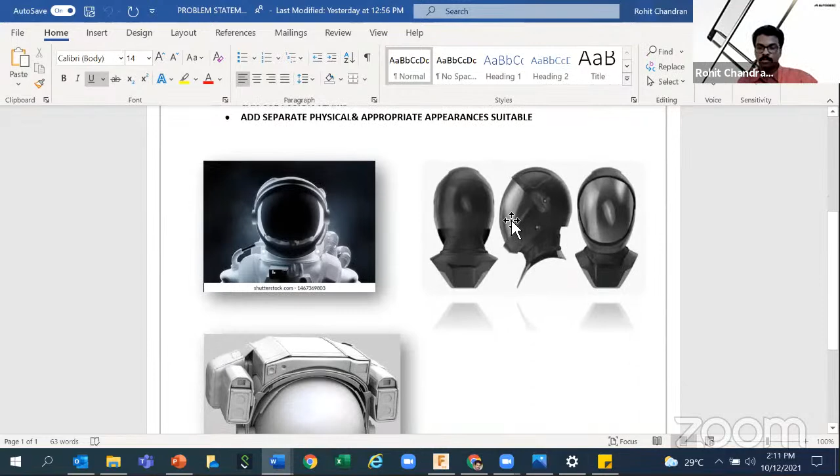There was one activity I showed you yesterday: design a custom space helmet. This was just for practice. If anyone has done an interesting design and wants to showcase it to others, I will tell you the best way to share your design right now with us. The problem statement mentioned yesterday was that you can add a reference canvas, use the 3D modeling tools, and then add your own imagination and creativity to finally come up with a 3D model. It was meant to be simple, not much detail on the inside, just something about the exterior. That was the main objective. Hope you had done that.

Let me share my Fusion screen and show you how to use the cloud to share your models as an instant link. So with that, I can start.

This was our yesterday's project, and you can see that whenever you update some content in Fusion Team inside the project, it will be updated with the time slot. Just right click and select share public link. That option is there, and it's very user friendly. We're not asking you to attach long files to share your design, no zipping the file, nothing is required. Just go for share public link.

Here you can see, just activate this option, and this one link will do. Even if I just copy paste it into any browser, directly anyone, without even having Fusion 360 or an Autodesk account, can view your model in 3D. Let me show you how.

Why I'm telling you this is, if someone wants to show their design, just put the link in the chat so that we can directly copy paste and show it here, if you really want to showcase what you've done to others in the form of a 3D model.

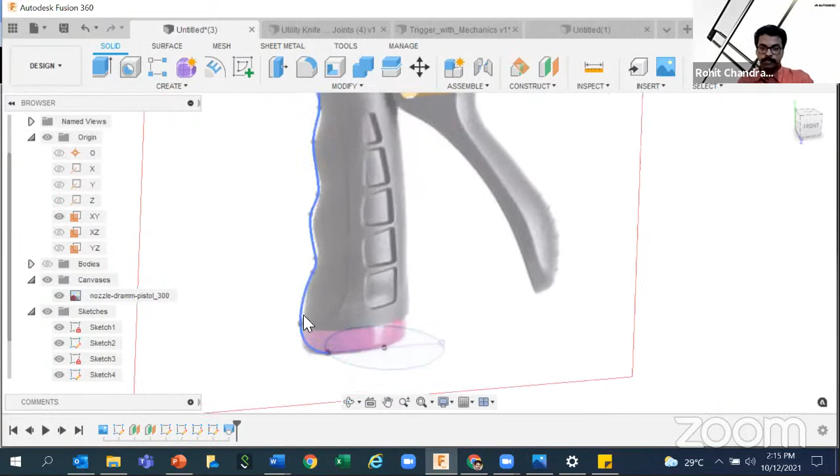You know what is spline? Then after that, I had done a loft so that I can get the profile. Since this is not a surface, you may be wondering how I got the profile directly.

So that's actually with the help of that guide rail that I had used for the loft. The loft, once again, I can show what all things I had selected: two profiles, top and bottom, then this guide rail. This is one extra option.

Unless you give this option, it will be directly like a straight joining, just a 3D model. But if you want to have some more patterns or contour, if you are really focused on the outer or exterior design, you can add this guide rail, but make sure that guide rail or extra profile is intersecting with your other two profiles.

Otherwise, you may go on getting more errors that the profile is not intersecting properly. So make sure that it is joined. And whenever you are seeing any error, please don't close that and don't start over once again.

Read the error, what's the software saying to you. Just understand where is the error. Maybe it's a small problem. If you came a long way up to the final stage and you are finding some issues, you think everything went wrong and you start over once again.

Because during the competition, the time is very critical. So if a time stop is there during the live competition, it will surely help you. At that time, if the software is not showing the right outcomes, don't worry.

Just read it, what's wrong, what's happening wrong with your model. Just focus on that, zoom it, and if no joining is similar to that issue, just edit that. Just click on OK, because Fusion 360 by default is following the parametric modeling approach.

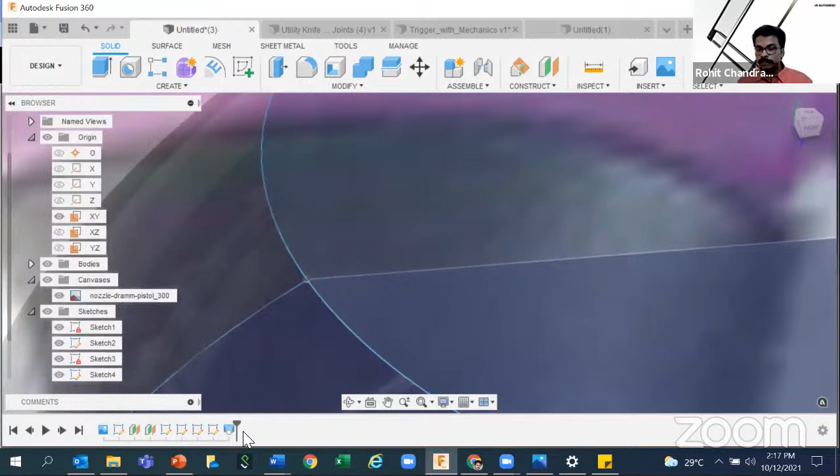So if you modify any of the parent features, the subsequent child features will get modified automatically. So that's wonderful, the tool is with you directly. You can modify using this timeline. So you don't need to start over, you can just edit it and proceed.

So that's the thing I just like to highlight to you. If in case you want to edit the sketch also, you can do that, right? So this was the loft profile.

Then today what I'm going to do is take a new tab, and I'm going to show you the next environment known as freeform environment, or basically the designers call it sculpting. So just click on create form, and you can see that all the icons change to the purple color. Actually, not the same icons, these are different icons, correct?

But check the name: create, modify, something known as symmetry, utilities, and other things, construct, inspect, all the things are similar to that of the solid modeling tools, correct? But here it follows a separate uniform color code, it's like in a purple shade.

And I told you yesterday that whenever we are seeing any options with this blue shade, that goes for the solid modeling. And inside the surface, you can see all our orange guys, so that means that is dealing with the surface, correct? And again, form is this one, which is another sub-workspace inside the design itself. So many options are there inside this design workspace, this is one among the option.

Okay, so here you can see that all the tools are coming in this purple shade. Whenever you just type S and go for extrude, I told you that you will get the command that you can use, correct?

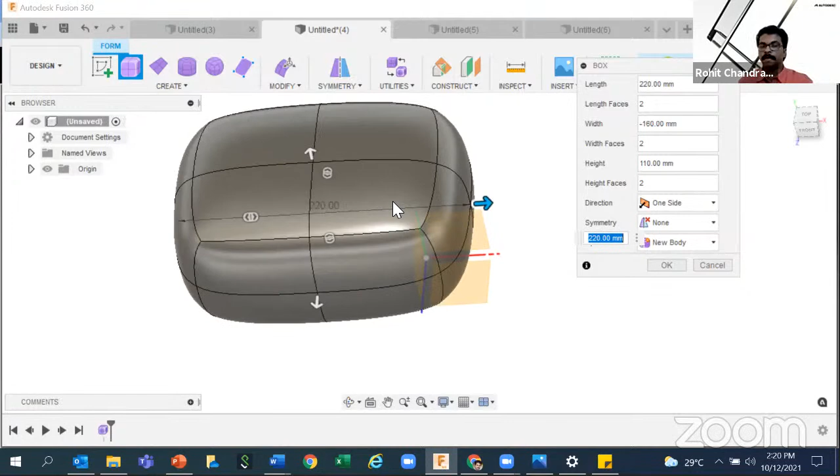And I told you that freeform modeling, designers also call it the sculpting environment. In sculpting, based on the operations or forces that you apply on your raw material, you get the defined shape. You can sculpt it, right? Whether you are wood sculpting or rock sculpting, based on your operation, you get the outcome. So just think this is the digital replica of that same thing, meaning you should have more features to get your job done.

Yes, what you think is correct. You can do many things inside this sculpted environment. Right now I'm just starting with a box. My plan is to introduce you to this tool, not just showing simple designs and saying this is how it works.

So this is the box then. Before deciding the dimensions of the box, you can put it using this manipulator, and again one more option is there. These are actually for dividing. I'll tell you why this division is coming. So division across the width, across the length, and across the height, you can make the proper division.

For the time being, I'm just keeping it as 2 minimum, minimum value 220 by 160, and that to the negative value. Negative value simply means in the opposite direction, no other extra meaning. I'm just clicking on OK.

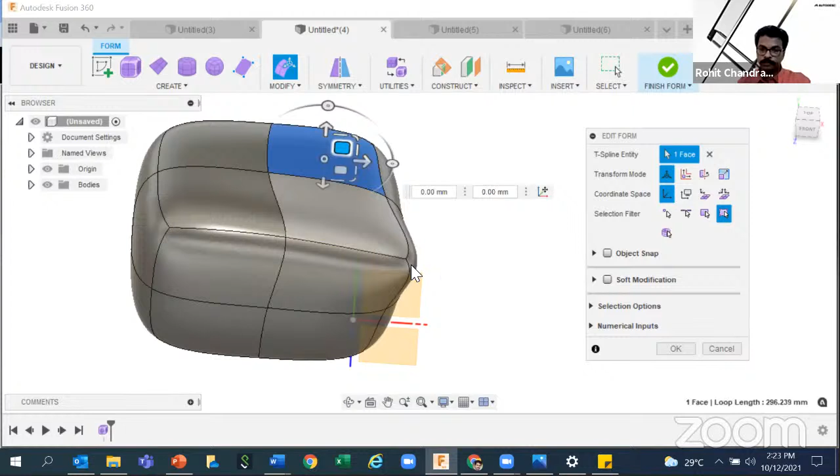So this is your advantage: either you can select your face, or you can select the vertices, or else you can directly go for the edge selection. And these manipulators will surely help you align based on your design or creativity. Suppose if you have any background canvas image, you can focus on that and gently go to the respective views and get your design done in the right manner.

Right, so if you want to pull, if you want to push, anything can be done. I'm just distorting this box just to show you how much freedom you have with this tool. So that's just a simple edit form tool.

But moreover, we have lots of other options to create both surface as well as solid models. Don't think this freeform environment is entirely for solid modeling. It comes with both. Basically, we will get the surface models and later we can thicken it.

If you are using box directly, you can create the solid body. But see what I'm going to do right now. This top face I'm just deleting. By hitting the delete key, I can see that a hollow space has arrived. Now what's inside? It's like a cavity thing.

Now if I simply click on this finish form, what I can see is actually a surface, not a solid model. So this is having 0 thickness, and the depiction of the surface model is just the orange wrapping that you can see on my screen, in the browser. So I just deleted one face and I got like this.

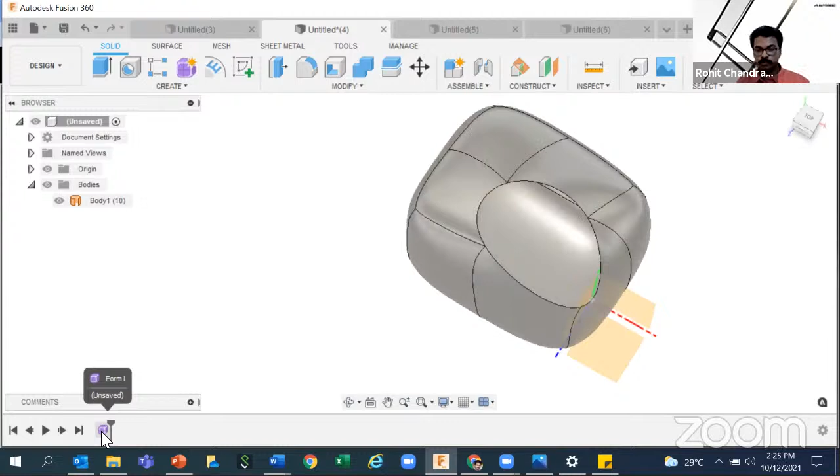Now let me go back. If you want to edit or go back to your previous design form, just double click on it, or right click edit feature from the timeline. Both will work. Now again, if I want to fill the hole, there is one option known as fill hole. As the name suggests, it will fill the hole, fill the gap.

Now I am tired of searching from modify because lots of tools are there. So what I can do is type S and get the thing what you want. Fill hole. Just double click on it so that the whole selection will be done, and you can instantly see that your model got filled. Now if you click on finish form, you can see that it's a solid body.

It has some definite thickness, but that's not our point of thought right now. How you can design it with this tool, right? So let me show you a few more options before going for the live exercise.

There is a cylinder primitive here. Just click on the cylinder primitive, and either you can decide the correct dimensions here. This is 115.171 mm. Either you can hit your keyboard keys and type the value you want, or just simply make one more left click so that you can see a 3D preview. In this 3D preview, you have more options to edit: what is the height, what is the diameter, and what are the divisions.

So right now you can understand why this division is coming. Divisions are basically for helping us to modify further. You can see that across the diameter 8 divisions are there, and across the height 3 divisions are here, and these are the numbers where the user can override that. But there are some limitations. If you give a higher number, software may fail to show the preview because at the end it's actually a code. Software code is working.

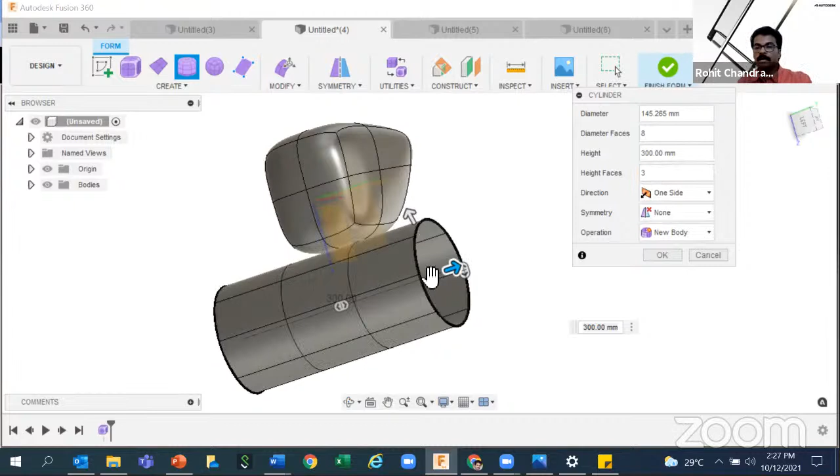What the user is giving, it will be happening and reflecting at the back end. So some limitations, some upper limit or lower limit will be there, but for the design purpose, you can keep initially a lower division, then start working on it, and there are extra options to add or remove extra divisions. Many things are there. So this is a very user-friendly feature. I can say that once you understand how it is working, or once you have created a small earbud or headset using these tools, you will get addicted.

Because there's a small form of addiction also there, I can surely tell you that, and that addiction surely will take you to further creativity. So let me show you a few more tools before going further. Modify, here you can see edit form. If I double click on any edge to select it, that will make the selection for the whole loop. Otherwise, if I simply click on one edge, it will show as a yellow highlight.

So yellow, as I told you, is one of the color codes inside the software UI that will help us understand what's happening right now. So if I select this, it means the surface got selected - just one face, one division got selected. Now if I click here, the edge got selected. So edge selection is highlighted as yellow inside the T-spline. Again, if I make two more left clicks, the whole thing will be selected, provided there are no breaks.

See, here also the whole thing got selected. Now comes the modification. So if I pull it in this direction, I can see that it's getting distorted. Let's do some interesting things, right? I can scale it like this.

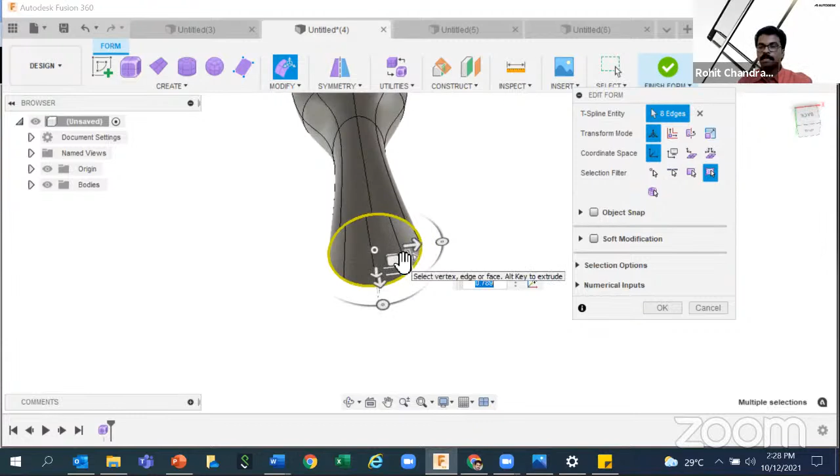Okay, now I can click on here. I can again scale it. Scaling option is there, many selections are there. This is for translation, scaling, as well as rotation in all 3 directions, X, Y, and Z. So that's your pretty advantage. You have more options to clearly manipulate your design. So you are the user, and you have the freedom to control your design, how it should appear.

See here, so easily you can do like this. For example, you can understand that if you want to create a wine glass or something, you can select the options accordingly. Right now I had selected one scaling option, which is coming to one direction. So if I select other, I can see the depiction coming, or what you are seeing on my screen, it will be changing the form.

And anything that you had or made a wrong choice, just do Control Z a couple of times. That will take you to the previous position. Control Y, Control Z, both will be working while keeping this edit form command active.

So that's the one thing I like to tell you, that you can design and you can win prizes. But if you follow the best approaches, it will help you design very efficiently. The thing is that you don't want to put lots of mental strain to get your design done. You can stick to your timeline. I mean, before the timeline, you can finish your job, provided you're working efficiently.

Working efficiently means that practice and patience you want, and purposefully you have to understand what will go wrong if you go beyond some limit. That means you have to make mistakes. I'm not telling that in one or two days you will be an expert. You have to make mistakes, then find what you made wrong, find a solution for that. So that's actually the best approach to move forward with any CAD software, especially Fusion.

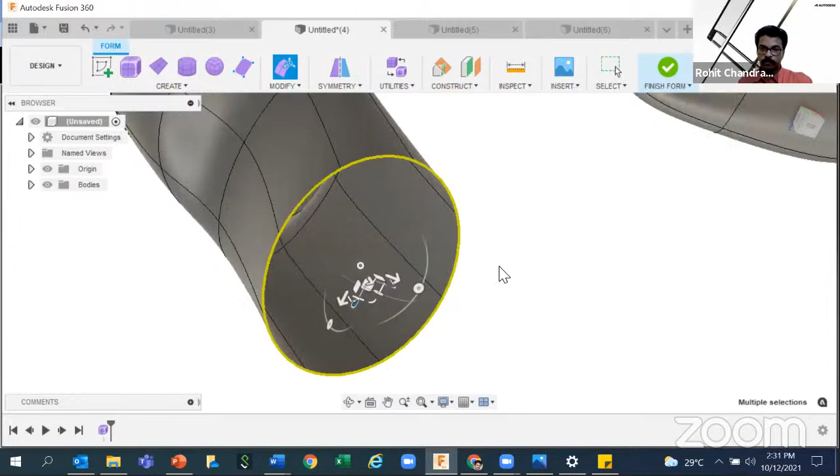So now let's move a little further. I like to show you one more tool. Double click on it and go for the edit form, and you can see that if you click on the Alt key individually, and if you pull it, or if you just use the scaling option directly, you can see that one extra face will be coming, or one extra division.

Suppose if I click here and go for edit form and hold down the Alt key, after that you can press on any manipulator, so you will get some extra projection, right? Extra projection you can get, and that too according to your selection only. Whether you want in one direction or other direction, you can extend it.

So that means creating an aircraft wing, I mean with the aerofoil shape, it's very easy inside. So anything aerodynamic, more fluidic, more related to the 3D contour, you can manipulate the curve and get the job done. But the confusion comes if you have two designs, how you merge one design to another. So that's the more questions that you have in your mind. I understood that, so that's why I started from the primitives.

So we have more primitives, not just the box or cylinder. We have torus, right, in the shape of a donut. And again, that is subjected to modification. You can use individual manipulators and you can do the job, right? So many things are there. And finally, these four things: extrude, revolve, sweep, and loft.

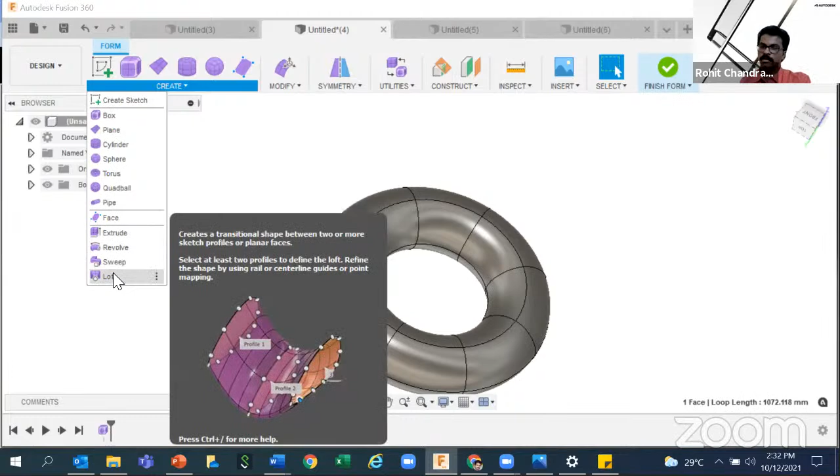Same concept, but you have more freedom. For example, if I'm taking one more design file, then going for this freeform, highlighting the planes, then I can simply have a spline here. But this time I'm not going to keep it closed. Yesterday I told you that I'm going to keep it closed since that is a solid model. Now I just simply leave it like this. Then let's see what happens if I do the revolve here.

See, you can get a direct model. But this is a surface. Again, this is T-spline, so more divisions you can manipulate using the edit form. So that's the quick story you can understand, right?

If you double click on it, you can see that you can pull it up so that you can change the shape. But whenever you are dealing with your design, go to the respective orthographic views. Otherwise, if it is in a perspective view or any other 3D tilted view, then you cannot understand that what you are doing is giving you the right result.

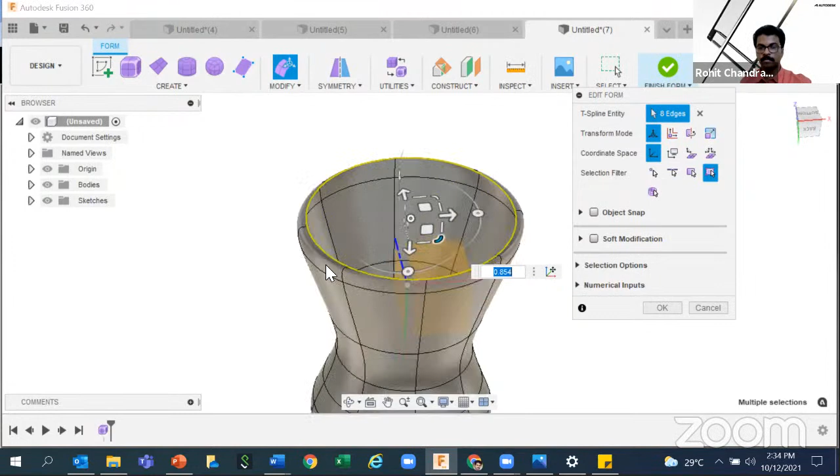So you can pull it up, you can expand like this. And again, if you hold down the Alt key and expand, you can get like this. Some extra bend over, many things you can get. These are design modifications you can do quickly. Right, now there's a hole here. Correct, so you want to fill that. So coming back to the fill hole option.

Fill hole, done. And for the filling pattern itself, you have the choice: collapse is there, reduce star, and fill star.

So it's a big environment, a big tool actually, a set of tools. Earlier in the older Fusion versions, it was coming as a separate workspace, but in the newer versions that all of you are using, it's coming as a sub workspace. So understand that lots of scope is there inside this sub workspace.

Again, if you want to design a cup, in a few minutes you can design a cup. You can design a handle using the sweep pattern. Many things can be done. If I go on explaining, I can show you all the tools, but we have time limitation.

Instead, what I'm going to do is we will go ahead with one example. What is that file that you have to open right now? Let me show that to you. Here there is a file known as trigger with mechanics.

So that file is already shared with you, trigger with mechanics. Just upload that. Upload where? Upload to your cloud.

I already did something, but I want to show you live, so I'm just uploading, re-uploading. The file name is trigger underscore with underscore mechanics. See here, the software identified that it's a Fusion native file, so F3D, and the file size is 5 MB. Just click on upload and wait for a few seconds.

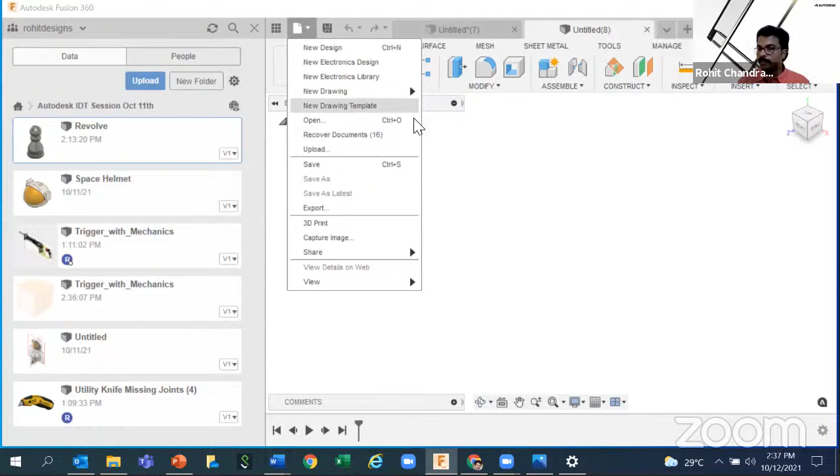You can still work and you can save your design. You can export your system as well as directly save to your local system. So many options are there to save your data, whether to the cloud or to your system with any format you want, it can be done.

Okay, so this is the file, trigger with mechanics. This is actually an assembly of a reciprocating saw.

Yeah, one second, let me take it. Yeah, trigger with mechanics, yeah, this is the file. It's the latest file. The earlier one was which I was doing before the session, so I'm just taking the newer file. How can I understand this is a newer one? Check the time slot.

So it's loading. Okay, this is your file. No outer body is there. And here see the timeline.

It's a big list because it was done after many features, that's why you can get a scroll bar. Understand that for your designs also, the timeline will be big because you have to do lots of job. Even for the competition, you may be using multiple features, even the sculpting itself you have to use. So many editing options that will be recorded in the timeline - it's actually a good thing for you because everything will be recorded in a proper manner.

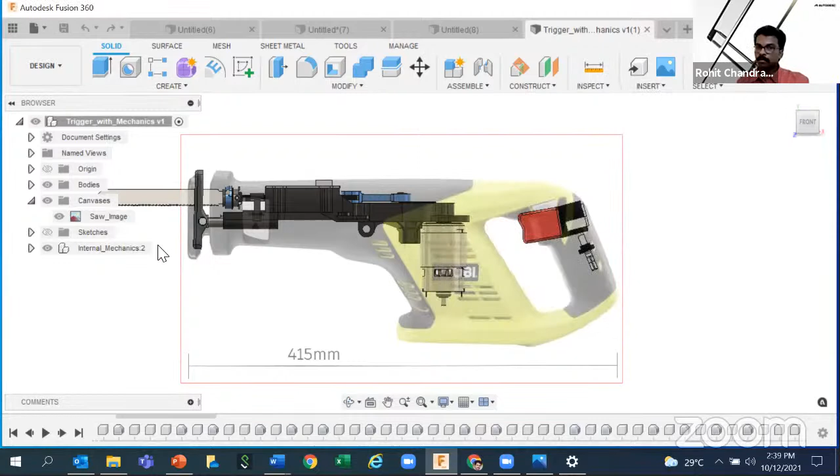Now check the design. Here there is a reciprocating saw image, and canvas means insert canvas, what we did yesterday. Just add an image to your plane, any plane you want, then you can position it. For this exercise, there's only one view, one side view, with the dimension 415mm, that means 41.5 centimeter.

If you are really focused on dimensions, that's also important, because for the competition nothing is rough. You have to keep it in proper dimension, and again tolerances, any deviations, some limitation will be there, plus or minus some value. So you have to be more professional.

But for practice, I'm not saying you should always go for dimensioning, because the freeform tool will stick to your mind mostly if you're working in a free manner. Explore it. Then finally, if you're creating some product, go with the dimensions. That's my simple suggestion.

Right now we are going to be a little more professional, because I'm going to show you how you can create the outer body with the freeform. So there is an option known as calibrate.

Once you click on calibrate, nothing will come up. What you can do is simply click on one end and the other end, and you can see the value coming up. This is either to scale up or scale down the image, not the model. Already we have the model, this is the case I'm explaining.

If you have a 2D orthographic view, I'm telling again orthographic view, not a perspective or any tilted view, then only you can take the proper reference, whether you want to take the sketching and move it forward with the 3D model. So at that time you should make sure you are sticking to the dimension.

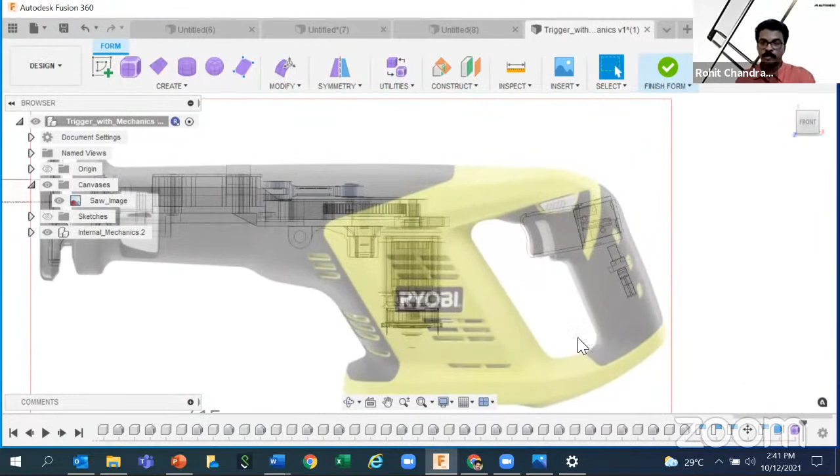We are not focusing on the internal assembly, but we want a reference, to check if our design is clashing with the mechanism. That needs to be kept in mind, that what you're designing should not clash with the inside or any other extra protections in your design. We have this, we are inside right now. It's already calibrated, I mentioned you.

Now let's use one cylinder, the same cylinder, and I have to decide the plane where I want to keep the cylinder. I can keep it here, or here, or here. But for our purpose, I want to create a handle, something more organic. So we have to think a little more ergonomic, whether it will be user friendly for us humans, whether we can easily hold that thing. So we have to make sure what type of design you are going to do with your tools.

So the position is the important thing. I'm selecting that plane, and there's a red line coming here, that will help you snap it properly, because we cannot create a cylinder here and think it automatically focuses on this handle. We can create the cylinder anywhere and use a move tool, but the best choice is to use the snap option.

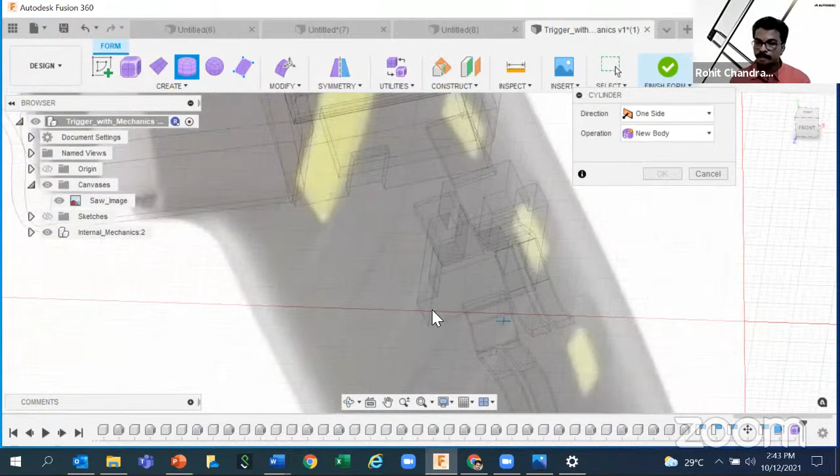The reference software already has the snapping option. So see here, I'm just creating a cylinder here right now, skipping the dimension. Now I got the bigger dialog box asking me for more, what's your specified dimension - the diameter, height, how much you want.

So you can control it, either you can manipulate it, so the manipulator will help you get the outcome based on your drawing, or if you want to go more specific, you can type the value. Let me keep it at height 70 and diameter 45, something somewhat in range with that of the image. That will do - okay, so now I got the cylinder.

Yes, it's not aligned with my drawing. So you have this move copy tool, or simply type M - those are the default shortcuts. You can easily get it, or type S and type move. So just readjust here. Okay.

More focus we can do if you're really concerned on the outer contours, because the proper designing has not started yet - we are just positioning only. Now you can see that I had used that red line, so that's why the divisions are coming exactly in the middle.

Let me tell you guys what I'm going to do. I will explain my plan, then we can move forward - otherwise you will be thinking what this guy is going to do next. So I will explain the proper plan. The plan is that I will complete the cylinder - the positioning of the cylinder - that's already done.

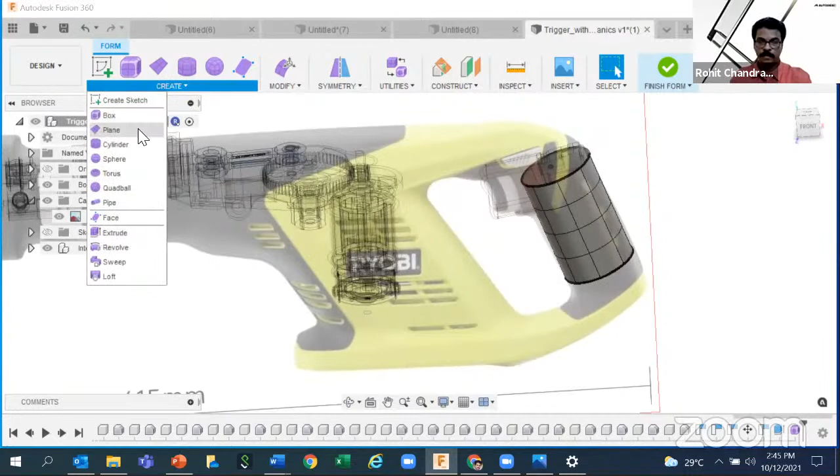Then I will place one more primitive option known as face. I will create a small face here, and that is clearly a surface. Then I will use the edit form options to start designing, and at some point I'll have to make connections between one T-spline and the next T-spline. So I'll be using some connection options - I will tell you what those options are.

Right now, just understand this small thing I'd like to mention: two primitives I will be manipulating, and somehow they need to be bridged. So there are lots of bridging options. Once I am done with one half, I will simply mirror the other half, and my job is done.

Otherwise I'll be thinking about what will happen on the other side, right? So instead, this is the quickest approach. If you want to design something symmetric, focus on the left or right or top or bottom, then just mirror it - your job is done. Otherwise, you can still focus on both by activating a symmetry line.

Anything will work, but for this I am just using this approach - completing one side and replicating it to the other side, then adding extra options so that I can modify that as per the image. So this is my plan, just understand this is my plan.

Now, as per the plan, I told you that I just need the half, so the other half I don't want. So I can simply delete it, or drag and select, or do the manual selection as well. Hit your delete key or right click delete - so done, one half is gone.

So we want just one half. Okay, now I can use what - face. I really request you, don't stop here. I had shown you box, I had shown you cylinder - that doesn't mean other tools are not okay. All the tools will come into picture based on your application.

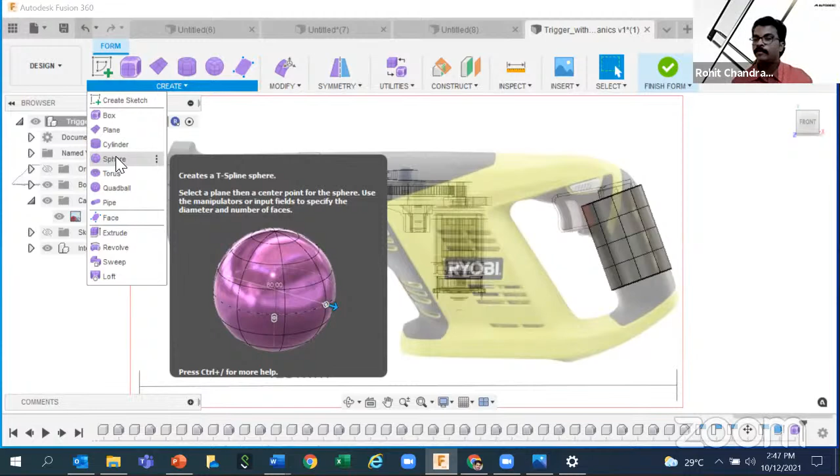So many options - this is a very useful tool for designers, especially for the IDT category. You can easily get the job done, and you can click on finish form, and add some physical material to complete it, right?

So I need to stick to the time - I have a proper time schedule as well, so I have to complete this exercise in the coming minutes. So this cylinder is done. Then the next new option, maybe you may be knowing this.

Face - so I have to just draw a, let's call it, quadrilateral or a parallelogram. Don't focus too much on this perfection - okay, later we can use the edit form manipulator.

We have that good guy with us, so we can easily manipulate. Right now I just covered this logo, RYOBI - never mind, that's just a branding, so I just covered that. I want something like this.

Done. Now what I can do is use the move copy tool, because if I go on designing, it's not actually a 3D thing, so I cannot expect that. It's wrong actually, because if I design here, it will clash with my internal mechanism.

Instead, I can type M and take it outside. To how much? That's a question. Go to the next view and make sure nothing is going to interfere with your internal mechanism. So I just moved it a little, just a move tool, nothing else, up to this. Okay, now the fun really begins.

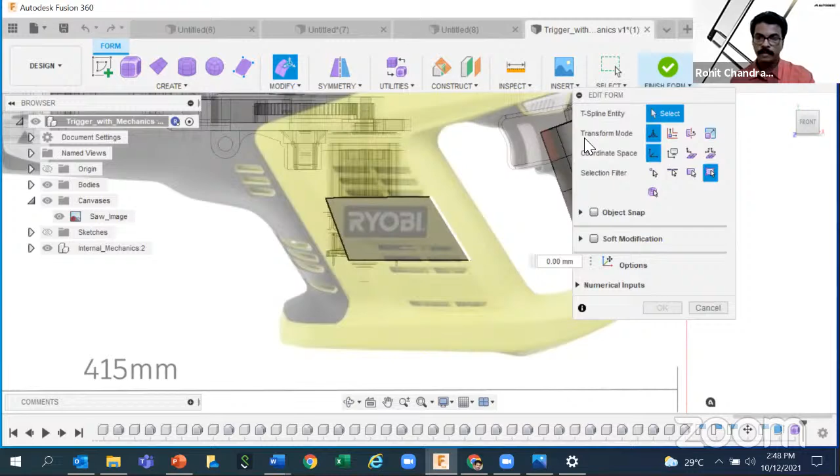I'm going to use the edit form manipulators. Holding down the Alt key, you will get another face or set of surfaces together. Right now we have only one edge, so I just pulled it like this. Then here also, I will repeat the same thing.

Why am I doing this? Okay, the next step I will complete that. If you make a wrong selection, no worries, do it once. So I want to keep it near this corner, so that's why I want that bending properly.

This bending - that's why I just created one more extra projection using the Alt key. Then here, Alt key. Or if you skip the Alt key and do it directly as I did for the other, that will also work. Somehow it should come as an S shape.

Okay, so you can modify. Because there is no top view provided with us, we have just one view, so you have the freedom to use your skills or your imagination. I just created a small curvy shape.

Now the next thing is again right click, edit form. Just pull it up, pull it down. Same here - make sure that everything is selected.

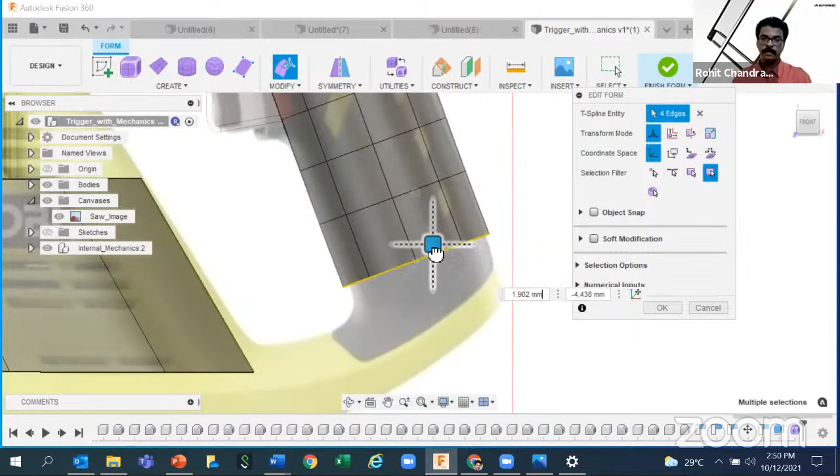And while working, don't focus your neck towards the screen because that will give you some health issue. Just sit in a comfortable position and zoom it, because zoom is very active now. Use the tools appropriately so you can work for a long time. Just zoom it and pull it down until some point.

Right now I'm going to select this and this set together. Using the control key, I made two selections, and using the Alt key, do like this. Why do I have to do this? I just clicked on two edges and built like this. I'll tell you why.

Now there is another option where I can connect these two - I can make them friends. Right now they are not knowing each other, so there is a bridging option. I can select this edge and this edge, then click OK, and automatic bridge will come.

Once again I can do this, because some tools you think show some magic, but understand what is happening actually. One here and one here, and how many faces you want in that bridge - everything is T-spline, so everything will have some divisions. I'm just keeping it as 1. Suppose I keep it as 3 and click OK, I will have 3 divisions - that's the meaning.

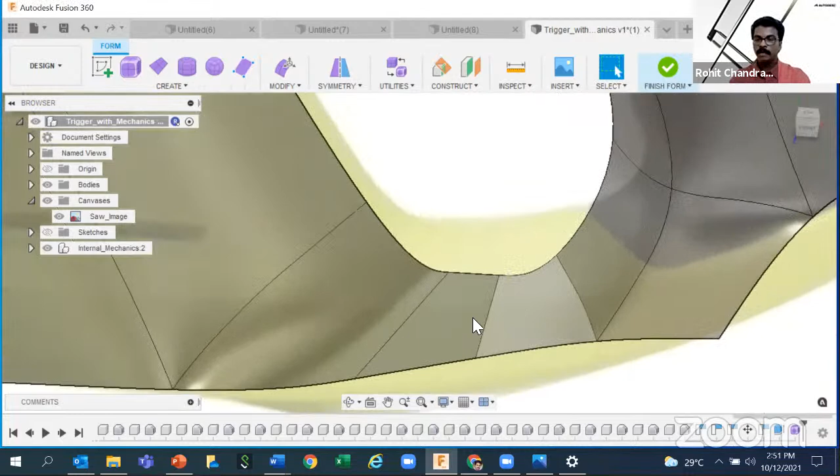So if you understand properly - I am just telling you, don't memorize anything, because that will not help you. Imagine, try to imagine what's going to happen. Done, so we made that bridging using the bridge tool, so right now they know each other.

Now our further task is to pull all these things down. Usually you can pull it, or you can use the manipulators to pull based on the image. This is fun, because designers may already be doing this - if you want to design shoes or kitchenware and you have that picture with you, the side view, you can do this.

Focus more on the perfection if you are really onto that. Right now, due to the time constraint, I'm just showing you the possibilities. I can also share more learning resources with you.

So I had done up to this. Now again, I made up to this, and you can disable the canvas, and you can see how you're progressing into the bodies. There is some sharpness, never mind that.

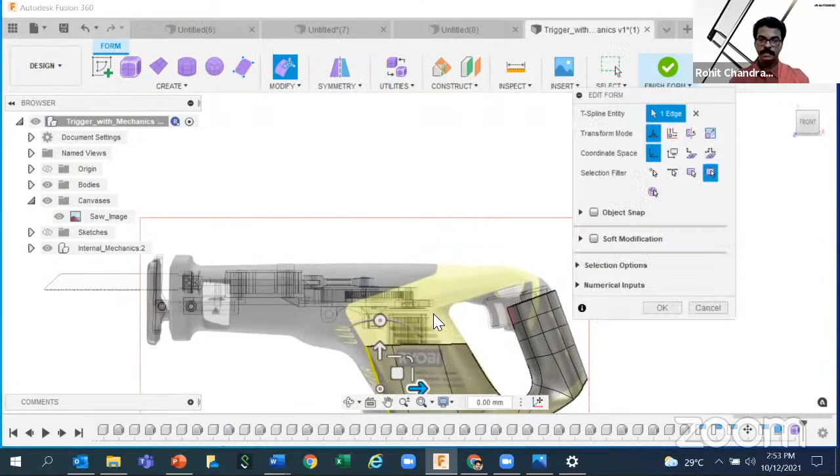We can use the manipulators. Right click, repeat edit form, pull it up, and here also up. Now you can understand what I am doing actually. I'm just pulling this thing as that of clay, right? Just applying some forces. And if some actions I made wrong, just undo that.

So here you don't need any prior knowledge to play with this tool, because anyone having some curiosity and imagination, even small students or small kids, can do that. Once they understood how it is coming, the next choice is how you can more leverage it. Once you understand how it's working, it's easy for us. So scaling option, translation, and rotation, all are there.

So again here, now I want to make another connection here. Merge edge option is there, or bridge also we can use. So this is another connecting option, merge edge, one edge to other, then set to selection. Automatic join will be coming. This is automatic, but make sure that your model has right proper edges.

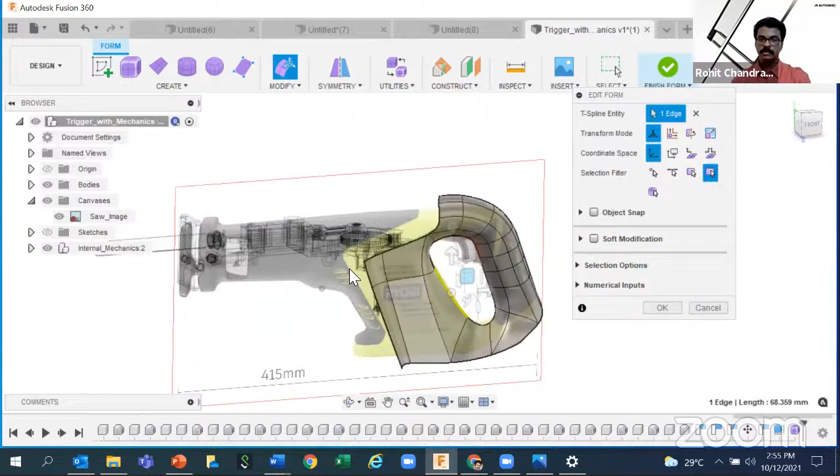Yeah, let's move further. So here you can shape it. Guys, please understand this is a professional tool used by designers, digital designers across the globe, so many outcomes are there. I will also share a few designs done by students who won lots of prizes nationally as well as in other events, and also our gallery, Autodesk Design Gallery. We got a gallery, see.

But initially I won't tell that this is too easy. Actually how I learned this is that I made lots of mistakes. Then I understood that something is not happening properly, what I am thinking, some issues are there. So do it and again redo it, that will help me. So what I did right now, I just pulled those two edges together to the left.

So I can have this small, like an opening, like a mouth, right? Now we need to close this mouth. We want to shut that mouth. And a few more things we can do.

I can pull it up. But make sure no two edges are intersecting, because that will create another issue. If two edges are intersecting, you will get an error from the software saying the two edges are intersecting. So remove that, because software cannot have two edges intersection. That's actually a wrong feature, wrong thing, so you have to edit that. But right now, as of now, we don't have any intersection.

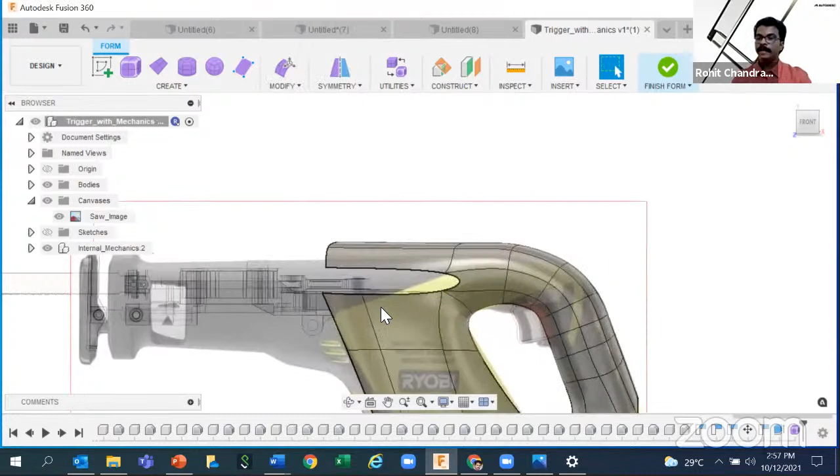So I did up to this. I will pause for a small break once I'm done with this other half. Then again, there is a small option to weld the vertices. I mean, we can do welding also. Welding means point to point, we can stick it together so that it will behave as a single surface. So there is an option known as weld the vertices, or type S, type weld.

See how much it is easy for you to get the command. Then pick the points. And sometimes you may be getting a box-like appearance, but try giving inputs in another manner, just change the selection. That will help you.

So see here, I had done the weld also. I just cancel it because I want to show you once again. Repeat weld vertices, click the points. Understand what is happening right now. Point to point, it is going to get merged. So that's the meaning. So once you understand what is happening, right now this is not showing a proper preview.

So I want this also to be joined to this group, so all these three points merge into a single point. So vertices can be welded together, that's the meaning.

See how fast we had done up to this. So you can imagine if you have some designs, whether you want to design a door handle of your home, then you want to 3D print that, how fast you can design. That's the power of this sculpting. But we are not done, we reached up to this level. And some of you may be wondering that its shade is just a steel shade, how you can make it colorful, right?

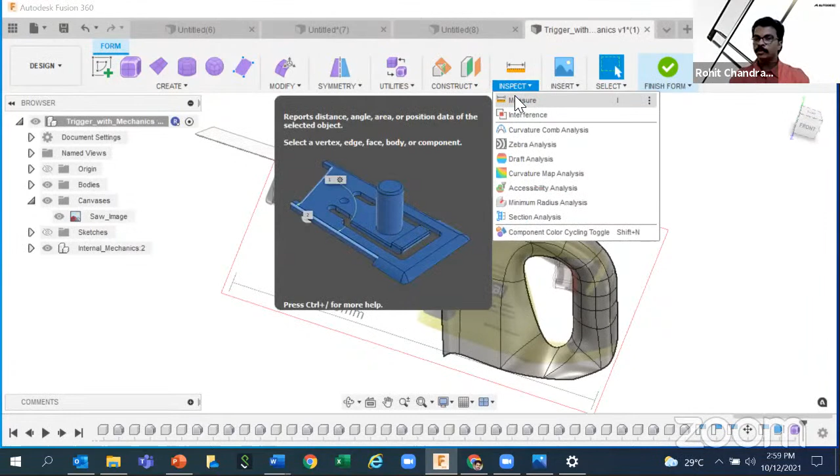So there's an inspect option here. If you want to do some quick inspection, what are the dimensions, all those things you can do here. You can select the edges and get the measurements instantly on the screen. This is a live measurement tool.

Here goes the inspection. So I am going to show you another tool known as component color cycling toggle. If I click on this, I can see some color codes are coming in my timeline. It's divided into some colors, and my surface changed into an automatic shade, more like a cyan shade. But if you try this option, you cannot expect the same shade you are seeing on my screen. It will be different, so that's the thing. It's an automatic color code. Never mind, if you want to really work with this, it's for you. Otherwise, you can simply turn it off. That is not going to create a big impact on your design.

Understand, this is not the appearance or physical material. Physical material and appearance, here goes that. Already yesterday I had shown you, same thing applicable to here as well. But this is just for creating that color. Okay, so I can disable that.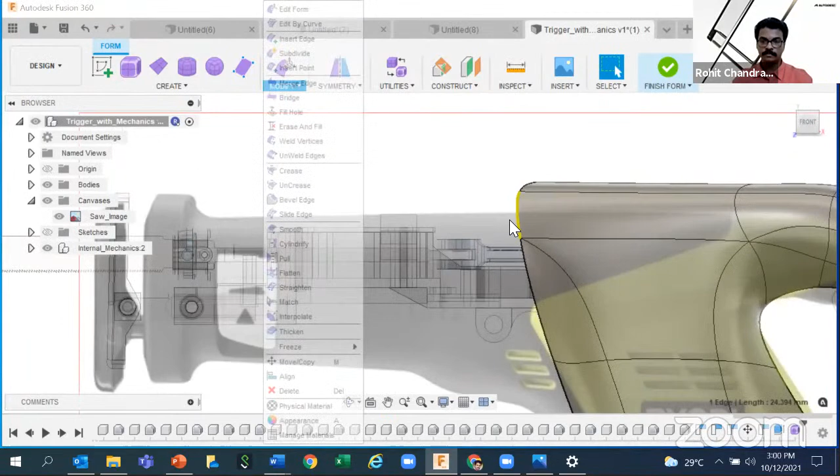Now either I can move forward and complete the other side of the question. Edit form, then use the alt key to pull. And you can again pull it down. Then you can do the weld vertices and complete the job. But that may take a few more minutes. I'm just showing you, opening the doors for you guys, how you can do this with the help of a canvas image. I need to create the other half. Due to time constraint, I'm just creating the other half and completing, because we have the assembly as well as the rendering, animation, and the technical drawing still left.

I also like to show you one more extra tool known as generative design. That is also for creating structures, that can help you, so I like to give an insight on that as well. I have a strict time today, but never mind that. If you want to come back to us, we are always happy to help you, because practice only makes you perfect.

So I'm just pulling it once again. What I did just now is I just made that curve straight. That's why you have to view in different orthographic views. You are a designer, you are not sticking to one side view. You have to look at all the views and check whether your design is okay from all views.

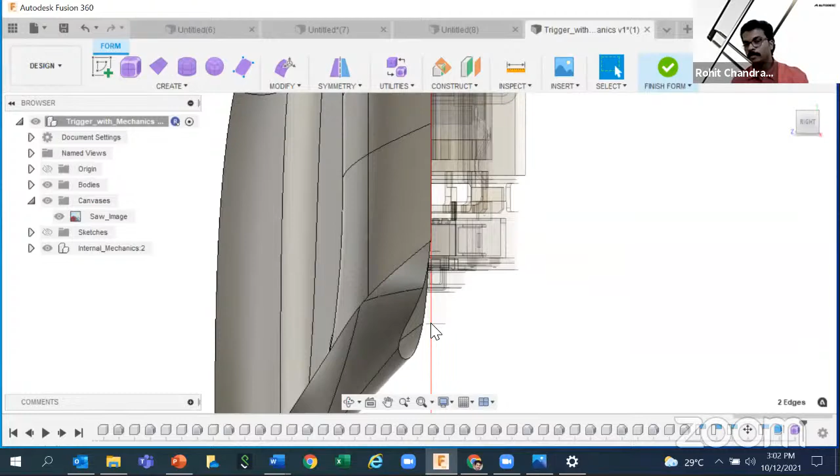So I had done up to this. Now I have to create the other half. But before that, I have to think on some point, that when I easily replicate the other half, I will get the exact half. Nothing is coming or interfering with this middle line. So if it is interfering or away from this middle line, that means I can expect a cavity, it's not the perfect half. So I have to make sure that it's actually a half.

So I'm just selecting this outside and inside loop, and there is an option known as flatten. You'll get this dialog box, you can select which plane you want. So automatically a small adjustment happened right now, so that it's perfectly flat. Earlier, if you remember, there was a small cavity here. Now it got filled. It's software, no? Software will do the job if you are giving the right inputs.

That's it, so we got the perfect one half. Then once I'm done with the mirror, I will open the questions. Now I just completed up to this 3/4. I'm not telling that full covering, full covering again will take a few more minutes. So I'm just limiting up to this, and I'm just going for a mirror. In the symmetry option, there is an option known as mirror duplicate. Just select your T-spline and the mirror.

Because lots of selections are here, either you can turn off the other body to make the selection pop up. So I just mirrored it. See how perfect the joining happened, because I had done the flatten option. But still, these type of things are coming. You know what you can do with this, you can pull it down or you can flatten the curve. Many things can be done. But understand that options are there. What you can imagine, software already has the option.

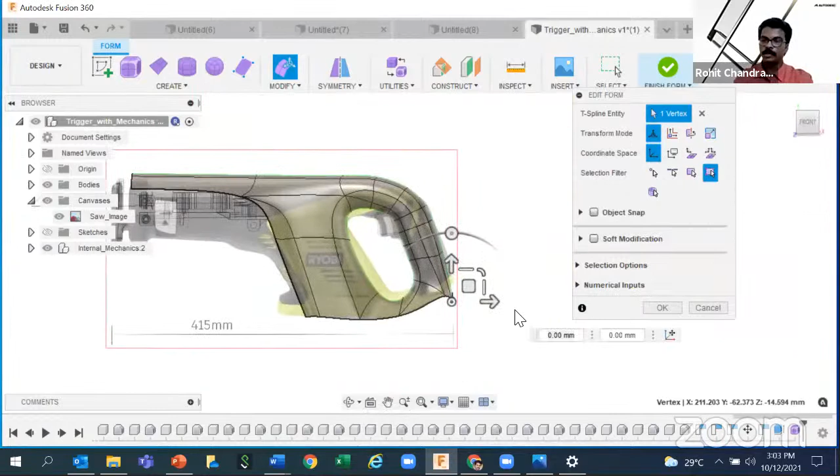Okay, so I replicated up to the other half, and everything is subjected to modification. If you design one face here, you can get a cavity, and you can use the fill hole option just mentioned, or you can use the insert edge option. If you think you need more edges to work on, more divisions, the insert edge option is there.

So what do you imagine? The software has the tool. Only thing is you have to find what the tool is and what you have to do with it. That's the only thing. So never think that the software doesn't have that option. It's well advanced and it's a cloud software. It keeps on growing, so there is no end for Fusion 360. It always has the latest tools to give you.

So I'm done up with this. Now I will do a small thicken and I will take a break. Thicken, right? I want to keep it 3D. Just a 2 mm thickness.

I can click on finish form. I can see that inside, the body trigger is actually already there. This is our newly created thing. And I can turn off other internal mechanisms and the canvas, so you can see that this is what we have created in limited time.

But never think that you can always expect this curvature. Errors will come, that's normal. Try to redo once again, so that will give you more confidence of the body. So just rename it for your purpose. Hope that is clear to you.

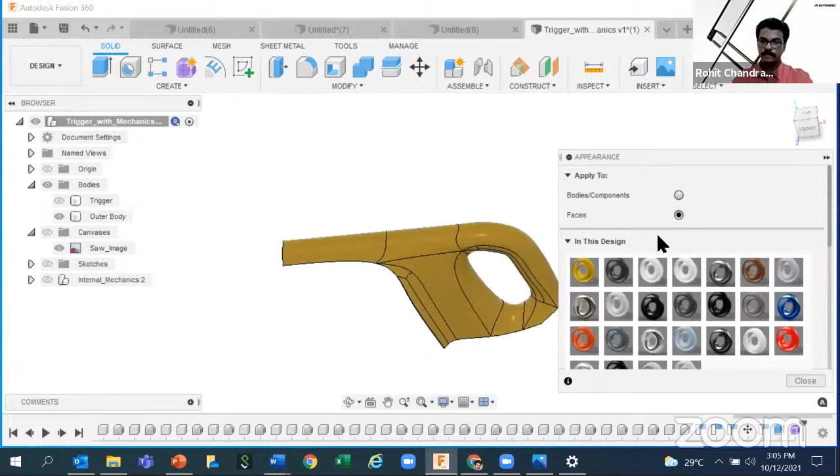Click on enter. Appearance. There's an option faces, then you can individually assign to shade. As you know, even your iron box will have two shades going, not just a single shade, because that's a new design. Multi-shaded design. So you just need to drag and drop, or if you want to edit the shade, you can edit that.

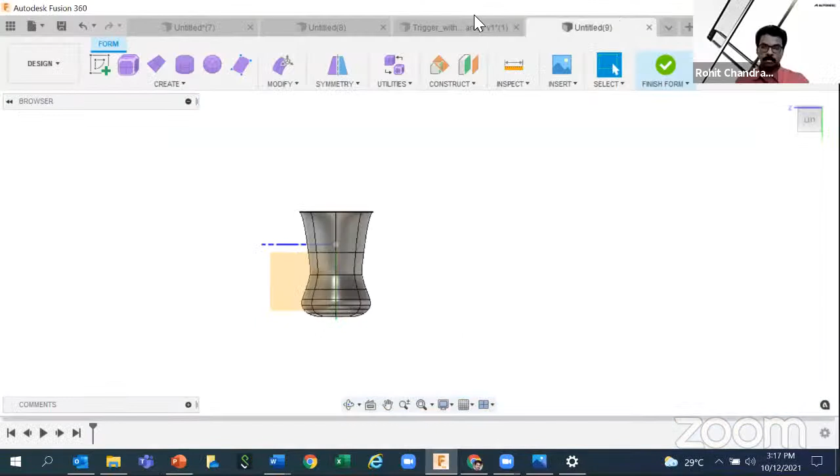Sure. Thank you. So let's resume. Yes, so we had done up to this one.

Okay, so that's free form. But please understand, here if you are even doing surface modeling or freeform modeling, all of it actually goes hand in hand. All these modeling environments, I mean solid - if you did anything with solid, or anything with freeform, or anything with surface as well, you can finally create a good 3D model using all three of these modeling methods. I'm not saying that only solid and freeform can help you, surface can also help you. Please understand all three.

If you are exploring the extrude, revolve, sweep and loft inside the surface as well, both will work fine. But here the surface thickness will not be there, and later you can thicken it. So understand what this tool is actually going to help you with - at least thicken. The same name comes up in freeform, the same name comes up in solid, and again in surface as well. So you can understand thicken will simply add thickness. So if you have a surface, the thicken option is there. And to find something, type S and get the command you want.

Okay, so moving to the next thing, because we don't just want an outer body, we want some internal mechanisms also, right? Because this is a competition - last time, the friendly competition, the problem statement was to design a mobile phone holder. I also checked that, so it's very interesting to check the creativity of the students.

So for a mobile phone holder, either you can think of it very simply, like a triangular support to support your phone. But if you are really dealing with online sessions, then you have a few more things that you need from your side. That means if you want to tilt the phone to portrait mode or landscape mode, some rotation features should be there, right? And if you want to change your seat position based on your comfort, then you have to adjust the height of that mobile phone holder.

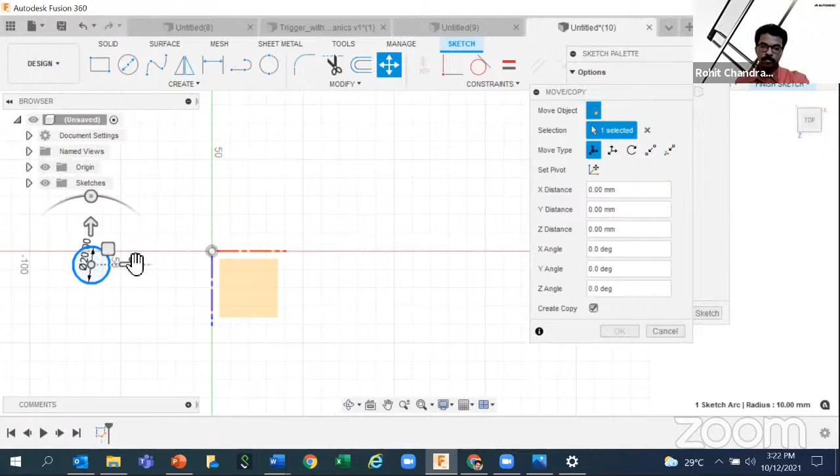That's why it's called move and copy—understand what's inside. Named just 'move copy.' Do you think that's just for moving? No, move/copy, meaning we can create multiple copies. That reduces your job again—you don't need to take the circle and create it again. Just select it and move it, and it will automatically create a copy, provided you're ticking this option.

So now we have something like this, and this distance you can control. And I want one more offset circle. Now I want just a line connecting this, and another line connecting this. Automatically, you can see that the tangent constraint arrived.

But if in the case it's not tangent, just pick it—these are the portions where you can use the constraints. It depends whether you want a concentric thing, concentric circles, just pick the two circles and keep it concentric. I mean the coincident—we use the coincident constraint while creating the layout to make two points coincident. Then there are equal constraints, tangent constraints. It depends on your situation.

So see how I did this. And again, if I want to trim the excess, there's a trim option here. If you had used AutoCAD before, there you have to first make the selection, then a few more extra selection options will be there, right? But here, just delete what you don't want. So just trim it off, because this is actually a similar feature from other Autodesk software as well, but more user friendly.

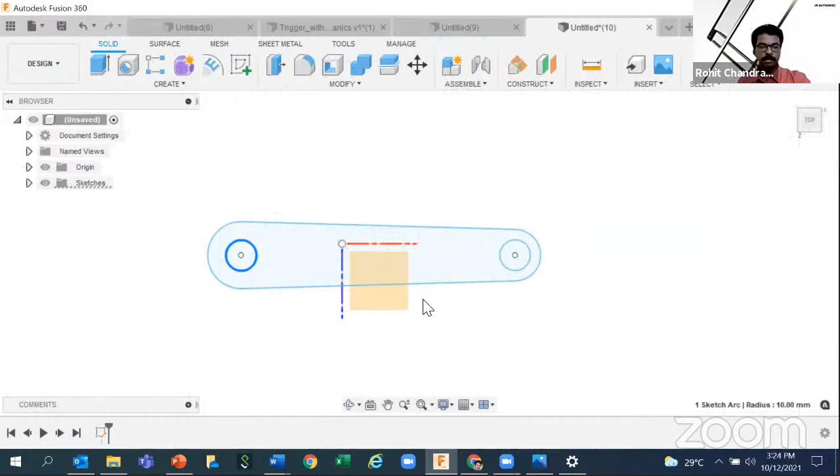But before the joint, let's make it 3D. So extrude, then thickness 10 mm. And also, guys, sometimes your statement will be mentioned in inches. That depends—the unit system is an important thing. Don't think that mm is the only option.

There is an option known as document settings here, and there is an editing symbol. You can override the unit system—centimeters, meters, inch, or foot. So please feel free to check this option. Otherwise you'll think you can only create metric, not imperial models with the imperial system. So both are acceptable—keep that in mind.

Why I mentioned this is because we will shortly be going to the documentation part—there we can document in both mm and inch. It depends on the industry; sometimes your industry will tell you that you have to do designs in inch, not mm. So you should know how to convert. That's why I quickly mentioned it to you.

So just have this thing—it's actually a body, right? Inside the body, I can see body one. Now I'm going to create a copy. How to create a copy? Make the selection the same here again, move copy—I selected as bodies, I ticked this option, and I got one more copy. So now I got two; one is the replica.

Never mind, I just got two. Now, how can I activate a joint here instantly? Okay, so there is an option known as assemble.

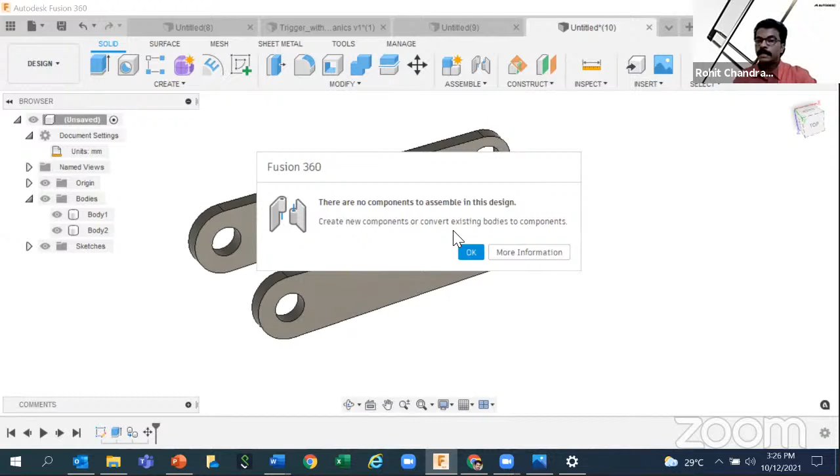So joint means it's actually a general purpose tool where anything scattered on this canvas, not white space, it's canvas, you can directly click on it and activate the joint. But see here, there are no components to assemble in this design. What's actually that? There are no components, clearly we have bodies, no components.

So you have to understand what is meant by a component. That's a small understanding which can help you create the joints. So with the bodies right now, it's not allowing us to create the joint. So component is somewhat a small concept, it seems same to you when I convert that into a component right now, but it's a different thing. So there is an option known as new component, or simply what you can do is select these two guys and right click, create components from bodies. For your eyes, nothing happened, but in the browser, something happened. The small change happened to this tree, it's coming as component 1 and component 2.

Now, if I do like this, it's free to move, and I can capture the position. There are position capturing options here. So right now, this is a component. Now, what's the difference between a component and a body?

Basically, few differences are there, I will point out all. If you have a component, then you can freely position it, number 1. Number 2, each component will have its own set of origin planes. If you have n number of bodies on your canvas, you will have only one set of origin planes, this axis as well as the axis origin as well as the planes, only one set. But here, each component will have its own origin planes, so you can take individual reference, right?

That's another one, and again third one is symbol difference. Symbol difference is for the components, it will be coming as a cube, for the bodies it is actually a cylinder. It's a small thing, but understand that if you really focus on all those things, whenever you see a design which is having this block, a cube, clearly you can say that's a component, a body it's a cylinder. And another difference is, the components, you can capture the position.

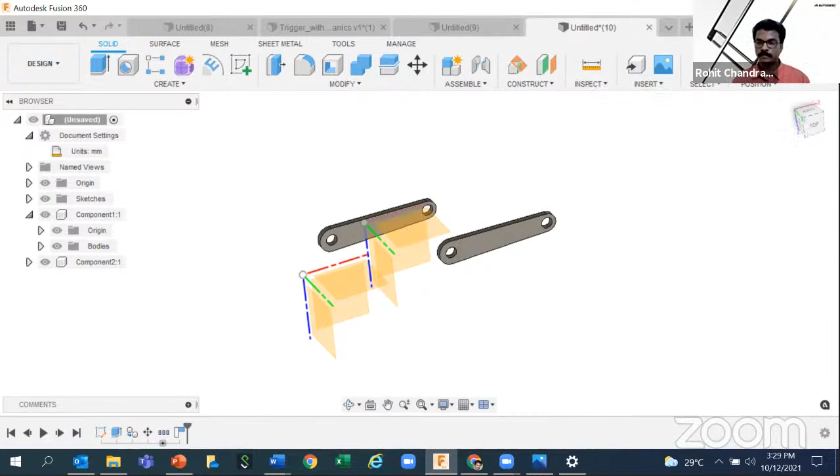So I am just keeping it relative, because sometimes we have to keep two joints together and we can create a relative position, so that relative thing can be done using the capture position. Once I click on here, my timeline got updated with that position 1 captured. See, now if I again move from that respective position, now I want to go back, revert, so it will be going back. But that doesn't mean I cannot capture a new position, still you can capture the new position. Because for assembly, first you have to keep it nearby, then you can perform the joints option. That's why capture and enable option is coming here.

But anyway, if you are not okay, just delete that. So sometimes these origin planes will be affecting your view, so you can close all those things. And one more thing, this is the navigation panel. So panning option, if you pan, this hand symbol is coming, zoom in and zoom out, here also we have the same option. Orbit option, right? Here you can do like this, you can do like this, or shift plus middle button.

All are functional. So here are a few more sets of tools that you can work with. And here there is one more extra thing that you can work with - multiple viewports.

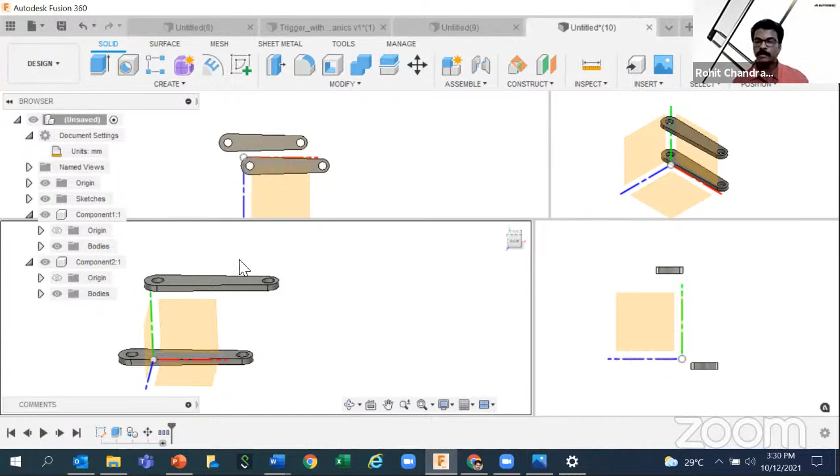Sometimes for your problems, it may be a design which requires attention to all the views: front view, side view, top view, or again coming to the sculpting, front view, top view, side view. So how can you work in a collaborative way without switching individually to the view cube? This is the answer for dividing the screen in this manner, so that whatever you do here will automatically affect the other views.

By default, your views will be single view. But if in the case you want to work in this way, it's allowed. Just keep in mind, as a designer, your comfortness, your creativity should come outside - that's your outcome. So you should know the other tools, the other user-friendly tools you can use.

Now coming back to the joints. Assembly joints, very simple thing - just select the reference. So I got one joint. What's the type of joint? First I selected one circle and the other circle for my snapping. Now I can keep it rotating. So I got two joints - sorry, one joint right now.

And if I want to simulate the joints, I got a new folder known as joints. Right click, animate joint. See? Okay, and even though I said it is simple, please understand as much complex assembly you can do with this. With these few options you can do many big assemblies, even the V8 engine assembly or anything complex. So let's learn something more and go for an example.

So just now what I created was just the joint option. I added a revolute joint between these two circles, circle to circle. Fortunately our model is symmetric, the same thing. But if it is different, take one reference to another reference, snap it and select the joint you want.

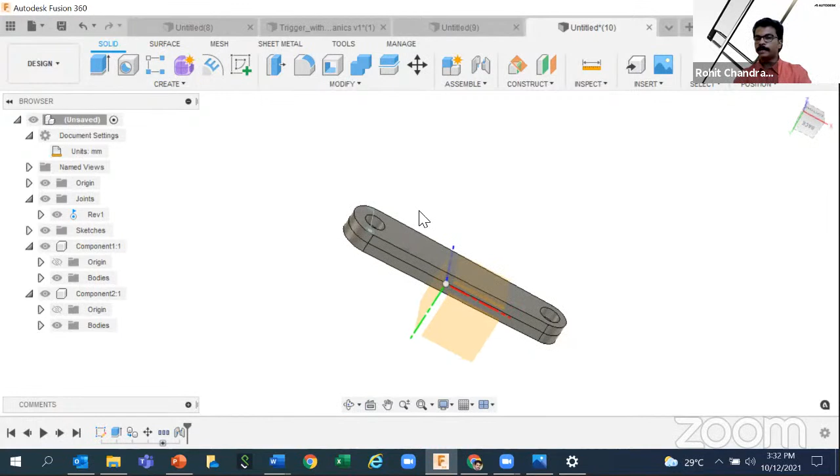Many options are there, but I'm going to add a few more links. I need a few more links so I can make it a linkage mechanism. So I'm just creating one more copy. See, move copy - I'm not going to create anything new because that's a waste of time.

Again, taking the dimension, going for another sketch - if your timeline is too big, that doesn't mean you have done a lot of job. You may have repeated the same thing which you can do in just a few seconds. You did it in 15 minutes - that's a waste of time. That's actually the power of knowledge. If you know you can use the move copy tool, just do like this and the job is done.

That's the effect of CAD - that's why it's called computer aided designing. We don't need that much effort to get the right thing. If you have the tool knowledge, one go, few seconds, job is done, save it and submit it.

So I can make one more copy, create copy. Done. Okay, one link. And I got confused about which one - I have 4 links totally, so which link do I want?

Very simple, there's a small interesting feature. Click on anywhere that you want to highlight, and automatically a small dashed line will appear here, so I can understand that this is that component.

Right click, there is an option known as ground. So ground - grounding means it will be fixed, further there will be no degrees of freedom. So it will come like this, keeping the other grounded. Okay, so this is how it works.

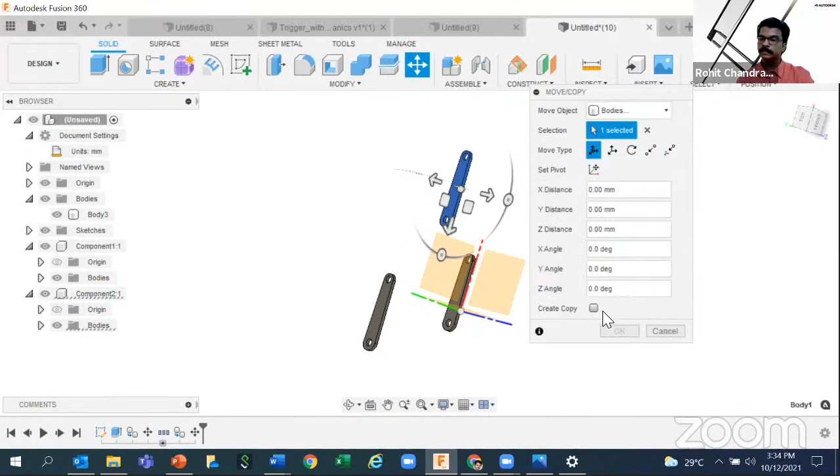Or together I can select two and create two more copies of that. Many ways I can do it, because it's actually based on your thinking. If you think something more creative, you have many choices, because I need 4 actually, but I am trying one after another - it will take a long time.

Instead, if I select 2 and create the copy, I will get totally 4. So these are small tips that you can use to move forward.

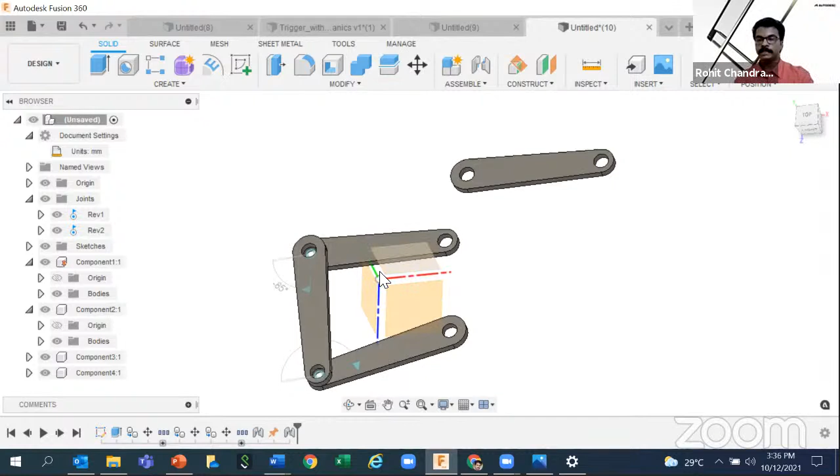So the link has some specific measurement. That exact wiper mechanism we cannot simply create and say ours is working fine. There are some laws known as Grashof's laws, which come to the dimensions. I'm not touching all those things, just understand that the link can surely help you to shrink your design.

You can say that right now many furniture designs are there, anyone doing it online, you can see we can take it anywhere, we can even keep it inside the cupboard. And finally, if you want to keep it as a ladder, or as a comfy chair, or use it just as a stool, many features are there.

That's actually the assembly. Same thing, if you can think something more creative, that problem statement will anyway be interesting. But if you put on your thoughts of why don't we do it like this, make sure it should be ergonomic and able to be manufactured, because on the other end we have many manufacturing methods.

We can 3D print it, or use milling machines, either subtractive or additive, you can create that. So while creating the design, have a thought, not a small thought, it's a big thing, whether your design can really be made into a business, or whether you can make it, because design and make it, that's the real thing. It's not just limited to the digital prototype. Something may seem too interesting, but if you cannot manufacture it due to some design constraint, then it's just for your eyes, as the movie title goes.

But if you can make it live, maybe not now, later, if you can create a model and use it, that's the exact outcome. So create your design with dimensions in the sense it can be manufactured. That means manufacturing, talking about the joints, where you can add the joints, whether you can really add the joints to that portion, that all comes to your mind before designing.

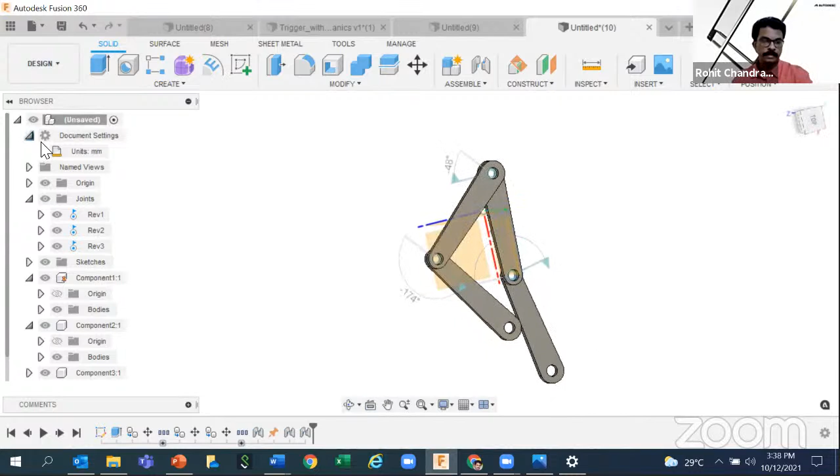So before going for a design, brainstorming with pen and paper surely helps you. Draw some rough design, then try to use that, then replicate it using the software. Many things can be done. I'm just opening some insights to you that you can do many things using the assembly option, right?

Okay, now I'm going to take an example. Actually, assembly has 2 types of approaches. If I say some approaches, you may be thinking, from where am I saying the approach, nothing is written anywhere about what approach we are using right now. So that's a basic understanding. For example, I mentioned that by default it follows the parametric modeling method, that's why the timeline is coming.

You can easily disable this by choosing 'do not capture design history timeline', so a small change will happen. Further, there will be no timeline, and your features will be individual, with no connection between them. There are extra options to keep it as direct modeling, like press-pull, for instant modification. But we want our timeline, so I recommend keeping the timeline active. By default it will be active so you can quickly change it to modify.

So coming to the assembly, we have basically two approaches again: top-down and bottom-up. One approach is creating all the designs in one canvas and assembling it together. The other, as conventional, you call all the designs and drag and drop or open them individually as part files and assemble.

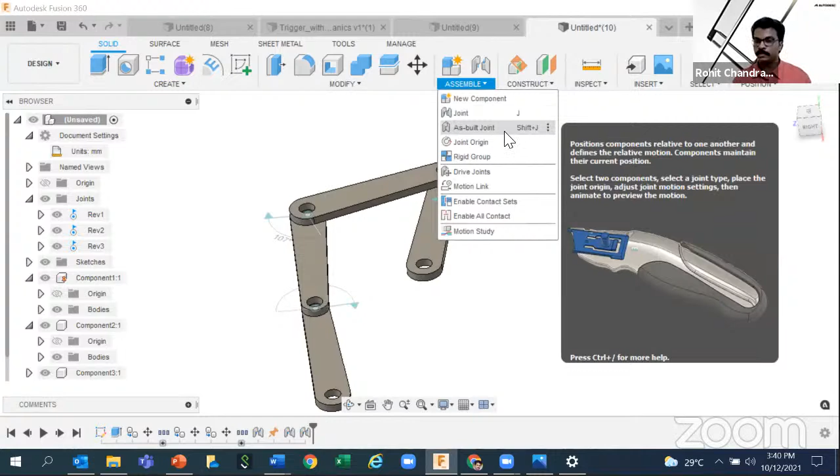A small interface change is there, I will show you that. So to keep it relative, this is the option for you - capture position, revert position. So you can keep it nearby and use the as-built joint.

So I like to explain the as-built joint with the help of an example. The example is a utility knife missing joints. So this is the example I shared with you - please open it. Right now you have something in mind about the timeline.

So there is a sculpt option here. If you double click on it, you can understand the body is properly sculpted - it's actually an output of sculpt. Sculpt, what is that? Freeform manipulators, after having the image in the background - see the canvas image is even there, it's just hidden only. So it's actually a product of the sculpting.

See how ergonomic this model is - the hand feature where we can hold our fingers very properly. So those are actually the ergonomics. Okay, that's about the design.

But our point of thought is on the assembly. Assembly, what to do with this? It's actually a utility knife, and that sliding joint is the critical part. But here, for your purpose, I had removed the joint and we are going to create it once again so that it will move perfectly inside this slot. This projection should travel inside, and that too with a specified length - it should not travel much more or much less. There are some values. As you move professionally to more tool knowledge...

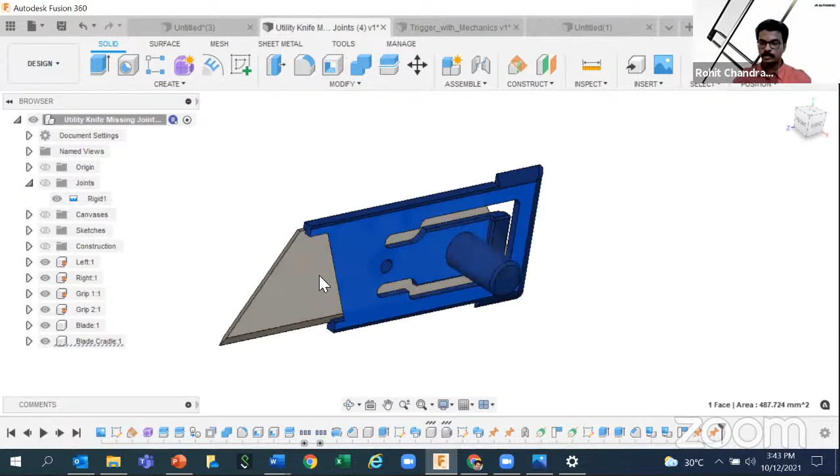Okay, so here, what I'm going to do is just check if any joints are already there. I can see a joints folder and I can see a rigid joint here. Rigid is actually one type of joint, and actually this blade and this cradle are two parts, but it's already stuck together with the help of a rigid joint. We don't need to worry about that right now because already one joint is there - that's why it's behaving like a single entity.

Find that. So now we have to keep it moving together with the blade and this cradle - cradle is just the blue thing, right?

Now we can start using the assembly options - as-built joint. Then select the components, selecting the components again. Make sure that you are selecting the smaller components first and the bigger one next - child, then to the parent. Give priority to the child first. So I had selected first the cradle, then the left half, because only the left half has that throat, so I selected that.

Now I need to tell the software that my sliding action should happen across this reference line - we need to be more specific. The as-built joint requires a few more inputs, be more specific so we can give it to that portion alone. I had selected that too. Clearly it is written as snap and the joint is written as slider, but you can override that slider. Then make one more left click to activate the joint.

Once again I can do assemble as-built - child first, parent next, then that reference line, make one more left click somewhere nearby the body, so it will activate the joint. Done - so we had created the joint, but it's meaningless, it's coming like this.

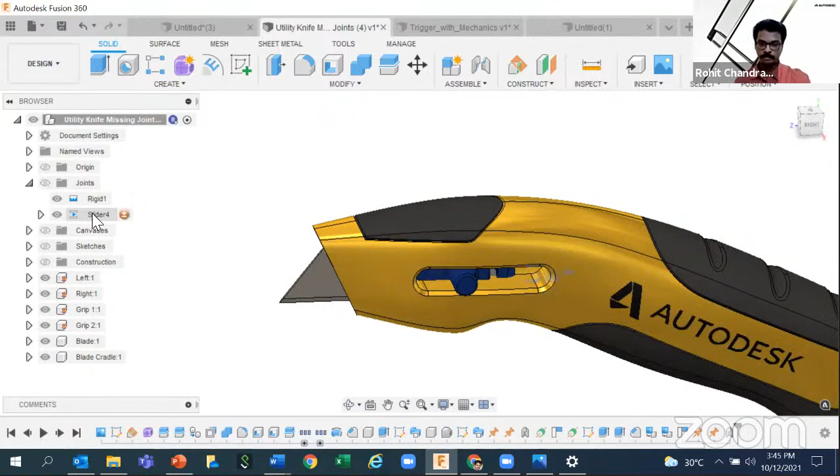Okay, so here I'm going to give some joint limits. Right click, there is an option known as drive joints. Drive joints, and you can note down the extreme points, 0 to 28. So it should slide from 0 to the right 28 mm or 2.8 centimeter. So I noted down that value.

Next I need to give that value to the edit joint limits. Very simple, just measure it and give the value. I'm just giving it as 28.

While you're understanding something, please think whether that makes sense to you. If your common sense says why you are doing like this, and if you have another option, do that also. Don't stick to what you are getting right now. If you have some good solutions, try adapting that too, because there are no standards to move ahead.

As sir mentioned, it's not from your background, it's how you think, how you can solve, how confident you are that you can show this to the world as a skill. So maybe the design you had done will be a smaller concept which everyone thought was a simple thing, but no one did it. But in your design it was found and it solved the situation. Then that is the best design.

So don't think there are good designs or bad designs. It depends on you, how you explore, how you think, and how you are going to use your design even for the problem statement in real life, whether you feel it comfortable. So what are the problems you find? Answer those questions yourself, and think about what you want to do with your design, so that you yourself are the product designer as well as a consumer.

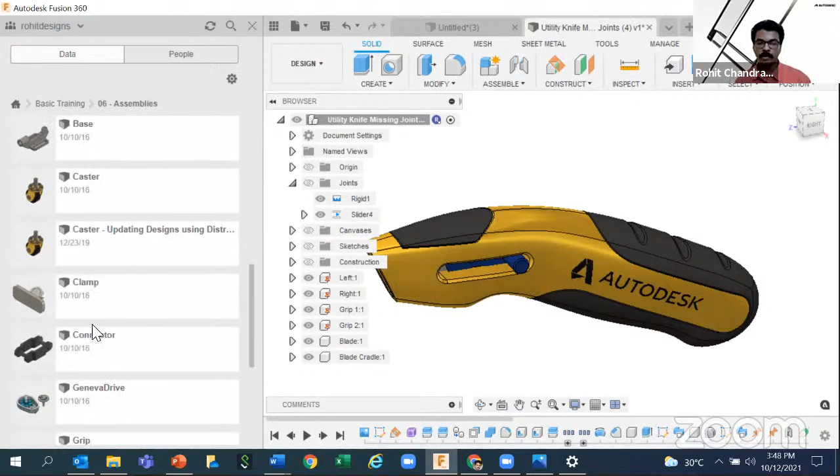You can open all these things and activate the joints. Piston linkage, Geneva drive mechanism. So if I open Geneva drive mechanism, I can get one file instantly. But whatever you open from the data panel, other than from your own project, will be read only. So please make a copy to your respective folder. Save as, so that will create one copy. Save as option will become available, right?

So here it's not activated, no joints are there. So you can complete it, make it into one group, then you can create a joint between them. Okay, so this is a small exercise for you. Geneva drive mechanism. What is Geneva drive? I will tell you.

Later you can search online, but I will tell you what this actually is. Geneva drive mechanism is nothing but a way to take a full input rotation and divide it into intermittent rotation. That means 360 degree rotation can be divided into 1/6 or 1/4 with the help of this wheel. It's just like a mathematical calculation.

So try to solve this, take it as a puzzle. The job you have to do is pull this thing to this slot and make sure it's connecting to each other, so one full rotation keeps the intermittent motion.

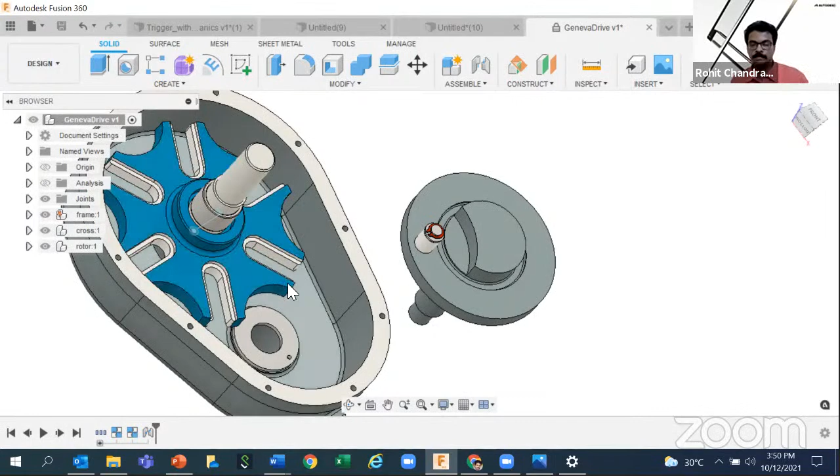Geneva is an industrial mechanism used in counter mechanisms. Many portions of it are used in real life, so this is a small example. If you cannot solve it, please come back to us, we will help you in solving this. It's a very small thing, just 2 to 3 minutes, but I have other contents in my pipeline, so I'm just showing you this small activity. Come back with more questions, or maybe you can try it right now.

Geneva drive mechanism - but before doing your design, create a copy. Like that, many things are there, that goes for the assembly and a few more extra examples.

Then coming back to the utility knife, let's do some rendering. We know that we can create the inside and all those things to keep it more live, but how can we render it? Go to the render workspace directly by switching.

So we can see that the UI got instantly changed. Remember, this is a cloud software, so obviously cloud rendering will be there, and it is. Some changes have happened to the appearance, but you still have options to override the physical materials. If you want to keep that outer body highlighted in gold, you can again drag and drop the gold material, same as we did in the solid modeling environment. Physical material and appearance is known to you, so I'm not touching that.

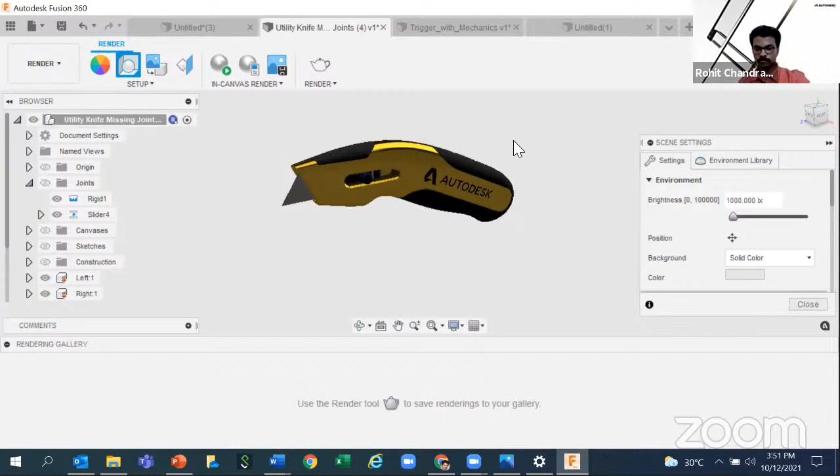I'm just going to tell you how you can change the background. Hope you paid some attention to the real rendered image. I can also show some good rendered images and student projects shortly, but understand - either you're designing a mobile phone holder as part of your friendly competition.

Already you participated, I mean the attending students. But rendering, if you can show digitally how your real model will be looking in real life - that means you can add a background, keeping your model maybe on a desk or holding a phone. That's the real understanding, so whoever sees this model can understand that your model is somewhat user friendly. It's a solution - like a mobile can be held at 90 degrees, 45 degrees, another angle, so you can rotate it. More friendly features are there. From the rendering itself you can get the clear picture.

Not just about that - anything, if you're designing a mechanical device, you can keep it in the background of a workshop, or a car running on a track. Similar thing - background addition is another thing I'm going to tell you very quickly how you can add. Here you can see the environment library. Go to the environment library, that's it, drag and drop.

So these are not actually JPG or JPEG or PNG images, or even GIF. Even though it's just an image, it's something more than that. It's known as HDRI, a high dynamic range image. It's a separate category of image. You may be thinking it's a panoramic view that you shot on your smartphone, but no, not exactly a panoramic - it's actually a different set.

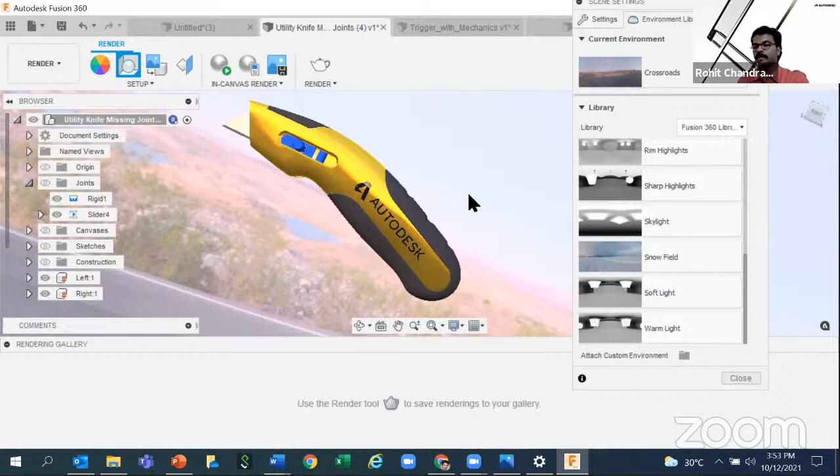Fusion 360 has a gallery, but some of these images you have to download to access first. There are many websites also providing HDR images, or you can search online how to create your custom environment and how to keep it as an HDRI. If you have a custom HDRI environment with you, there's an option known as attach custom environment. So you can use that - you don't need to use what's available in the software, you can always add. It's open to changes.

So it looks ultra real because it looks like a background coming in a 3D manner. And if you can limit the light, if you want to show that your model is looking how it looks in nighttime or daytime - positioning is there, so wherever you want to position it, how much you want to show up, and the focal length before doing the rendering. These are the extra things you can do before going for the render. Now I will show you - these are just the settings, we are not done with the render yet.

Rendering even started, okay.

Now I had just set all those things. Now I'm going to start one render. Basically in Fusion we have few rendering options, different types of rendering. One is actually this, the Aladdin's magic pot.

So magic is going to happen. One rendering option is here, just click on that, you will see the dialog box whether you want to use local render or cloud render. Cloud render means the cloud will take care of your rendering, you don't need to worry, your system resources will not be consumed, and it will take approximately 20 minutes for the settings you are seeing on my screen.

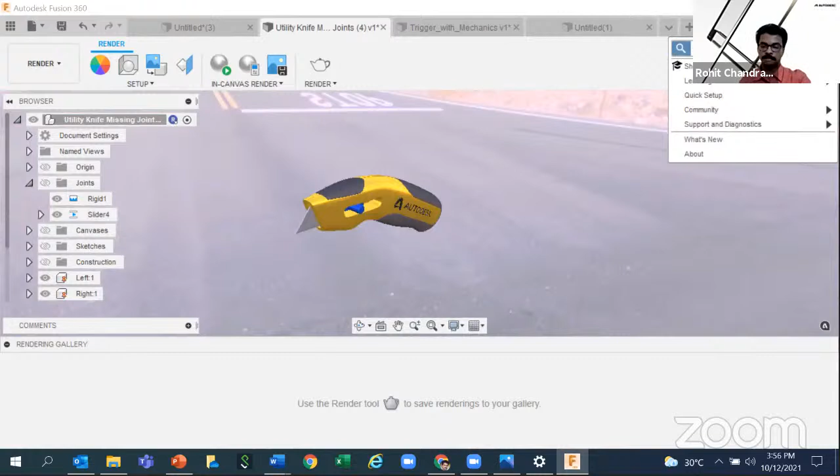That's the process. And local rendering means without going for the cloud, your system resources will be consumed, but make sure that you have a good graphics card. And if you don't know where your graphics card is, whether your system has a graphics card - if you are using a laptop, you will have an NVIDIA or AMD sticker there. If you don't know, I will show you how you can access your graphics card setup from inside Fusion 360.

There is a question mark symbol next to your account - downside, support and diagnostics, graphics diagnostics. There, on the downside, you can see the graphic details, GPU device. I have a powerful NVIDIA graphics card, but you have to check what you are having, or if you have Intel or the default graphics drivers. Your current details will be displayed here, including when the last driver update was. And you can currently update it if you have any issue, you can troubleshoot that, or update the driver directly by connecting to the website - that link is there. And if you have some issues viewing the 3D geometries, you can limit the graphic effects.

So these are extra options just mentioning to you. Suppose you really love the software, but think your system may not support it for your purpose - the recommended settings are at least 4 GB RAM, and surely a 64-bit OS, not 32-bit, though right now it's mostly 64-bit. Then at least 4 GB RAM, but recommended 16 GB for advanced performance. Then an adequate graphics card. And if your system is 32-bit, it's not even a bad thing for you.

Fusion browser is also available - you can get the same thing in the browser version. Just type Fusion browser, this is the latest edition. Just sign into your account, you don't need to use your system itself. Launch Fusion 360, it will ask you to sign in. You can see the same UI similar to that of the desktop version. I will put the link in the chat as well. So this is the browser version for Fusion. Anyhow, the software is here to support you, only thing is your outcome is expected. So if you want to access the browser version with the same thing, you can access it online.

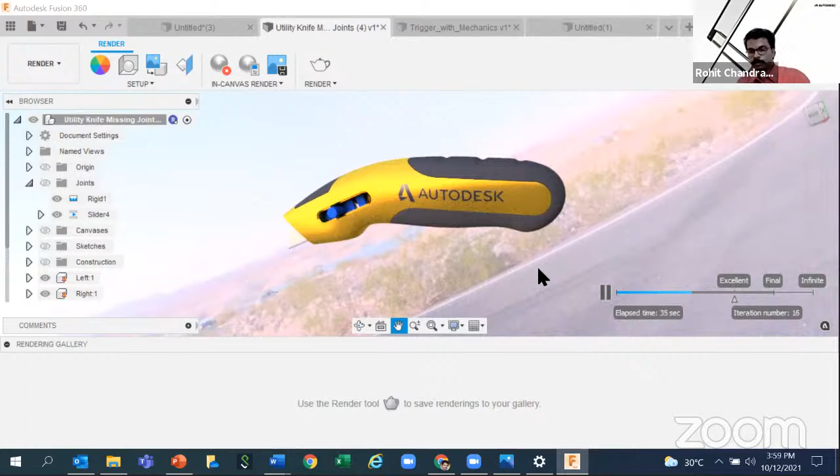Actually, I'd like to show you one more thing extra. Rather than just showing you the 2D rendering, I will show you the 3D rendering also - one option known as turntable. That means you have one design and you want to see how the model is rotating, and that rotation video, similar to a GIF image, should come in a rendered manner, so that people can understand it's not really a CAD model, it's actually a rendered image, rendered using the turntable option. So I will show that too - I already mentioned this in my syllabus. So 3 types basically: either you can use local render or cloud render, and the direct rendering option in canvas render.

And you can capture the image. There is an option to capture the image, that is available. If you want to stop this, you can stop it.

I will do one quick rendering. While rendering is doing, I will go to the animation and technical drawing workspace as well, because I need to take a few more minutes since 3 categories are left: animation, very simple but you should understand, then technical drawing, that is simple, then one advanced AI powered technology known as generative design. I will show that too. These things are pending but won't take much time. I will share the necessary learning materials right from our website itself.

Okay, so I am just going to do one cloud render. Before rendering, of course, the document needs to be saved. If you didn't do the saving, auto saving will be done. So rendering is happening in the background.

One more thing you have to understand: all cloud activities surely will consume some points known as cloud credits, some numbers. Basically those are some numbers, but for you it will be written as unlimited. I am using a commercial account, that's why I have some limitation. Based on the number of cloud activity I'm doing, these numbers will be going down, and later I can still access more. If you are really an industrial customer, then you can buy more credits. That's a commercial thing, but for students you don't need to worry about this credits thing. Whatever you do with cloud activity, whether the results are failed or not, nothing is going to get affected from your account because people have unlimited cloud credits. So that's why cloud rendering requires some cloud credits, like 2 credits, just for clarifying your understanding.

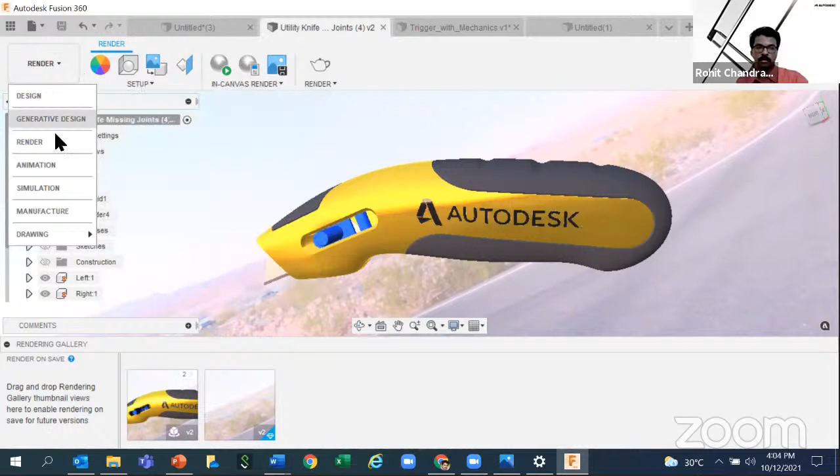Animation workspace, simply by switching the workspace, and we have a timeline. So what will happen right now is, if I extend to 4.6 seconds, then I rotate, that will be captured. So that was too fast, no? So I can...

For that product advertisement, sometimes you don't even need to depend on the ad agency. The software can do all those things, that zooming in, then showing that minute details, then zooming out, rotating, then showing the assembly part. All those things can be done with the software.

The main purpose of the software Fusion is that this is a one-stop software for all your needs, starting from scratch to the final documentation, animation, rendering, anything you can do, and you can share via cloud with your own account. You don't need to pay any extra because it's already free for students. So data sharing, nothing is a hindrance to you.

So I'm just showing the explosion of the assembly, because what's inside the assembly can be captured as a video, and you can control how much explosion scale. This is important, even if you're designing a mobile phone stand, some links are there, how it explodes.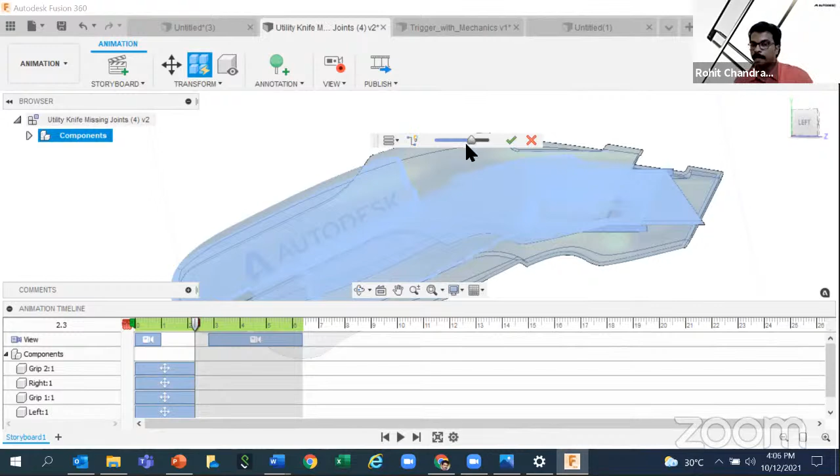I'm not telling that everyone can be an inventor on day one, but think about what's already existing. Learn what's there, why that design, why not this one, why the button is coming there, or why that link is in this shape, why it is too short or why it is too long. Then you create something on your own, customize it, because things are already available online.

This is the best generation. I can tell you that we are never running out of content online. We can search anything online and we will get the results, right? So try to come up with your own version, no plagiarism, something of your own version. So that will surely get some applause.

No worries if you are not getting the right prize that you are expecting for the competition, tomorrow you will be famous. Trust me, I have many students across India. They all started from under scratch, and right now they already participate in many challenges, and they keep on participating, not just one, many, and they publish on other social media. So right now, people know that someone from this area knows how to design, knows how to find a solution. Every company is looking for problem solvers, not just your qualification. If you can solve something very crucial, you will land a better career.

That's a normal thing, but you should have the right attitude. Attitude again, the learning skills, learning, unlearning, upskilling, all those things should happen. Even myself, if I skip on this and after 5 years I'm coming back, I will feel a small gap in my learning. I feel that some tools, where is that? Something happened, so that's actually not a good thing.

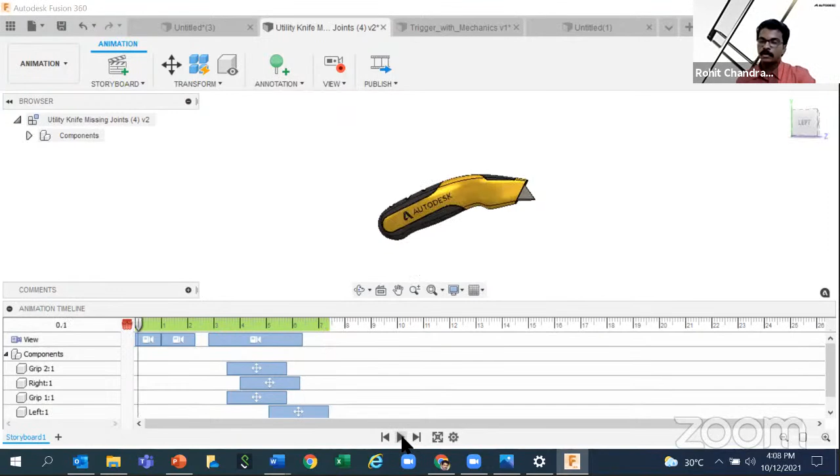So keep on refreshing periodically, so you will always be refreshed. Anything new that comes to you, you can always say that I already had experience with that tool, some similar tool is there in that software, this software, which can do like this. So that thinking will really help you to find the exact solution. Not just in IDT, any problem you have in the industry, you can do all those things, right?

So I had added some explosion, then I captured it, then I aligned the videos, then I'm going to play it. Finally, if I want to publish this as a video with no watermark, see, zero watermark, nothing will be coming, you can take it as your own video.

Finally, I'm going for the technical drawing also.

It's an animated video, but understand that rendering has a few more options. If I go on showing all of them, it will take more time.

In rendering, there is something known as motion studies. You can mention how much the blade is coming out from the body, then do a rendering as that of a real product working. That means in the rendering itself, it will come out as an animated video. That option is there - I'll share the link for learning, because that will take more time. It's a little bit advanced, but understand that the opportunity is there.

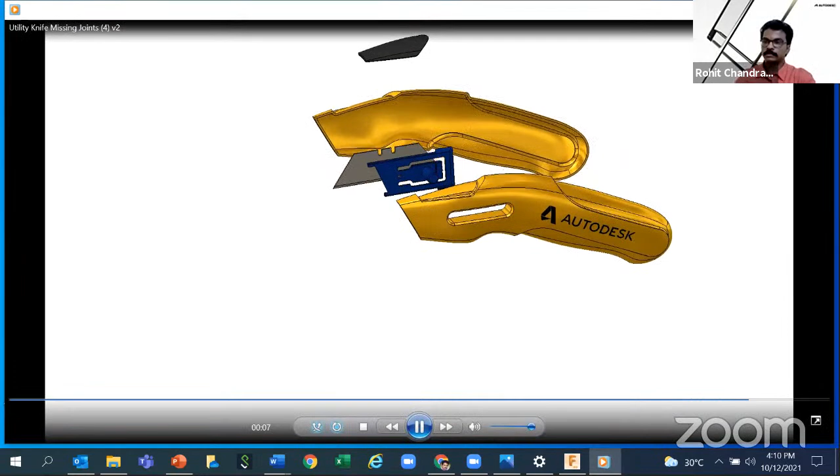So I'm just showing you the captured video. This is our video. Now it's up to you whether you want to add some songs, your own logo, or branding. It's a very simple thing, not professional, but understand these options can help you create something like this small video. So that goes for the animation.

Now I can go to the technical drawing part, how to document, because documentation is important prior to fabrication. We are still in the CAD environment. We had intended to manufacture, right? So before going for manufacture, we need to tell the fabricator these are my dimensions, I want this thing created with this operation.

Everything should be more specific. So I can document this, because documentation is important for your competition also. Documentation with standards - what type of dimension, which standard you follow, ISO or ASME. It's an international competition, so we stick to international guidelines. So create the drawing with ASME and ISO, both standards are there - American Society of Mechanical Engineers and International Organization for Standardization.

These are the two standardization organizations, and both standards are available inside Fusion. So I can select ISO right now. You can select inch, then A4, portrait, landscape - everything is there. I just create A3 and click OK, because it just asks what template you want. I selected ISO, MM, then A3.

So I'm going to switch to the next workspace, which will help me in documenting. You don't need to understand much more here, because it's very basic, but a few more advanced operations need to be mentioned, which I will do. A few more minutes and I'll stop it - just loading time. Sometimes this drawing workspace takes a little extra time. Don't close or do anything if your system is taking time.

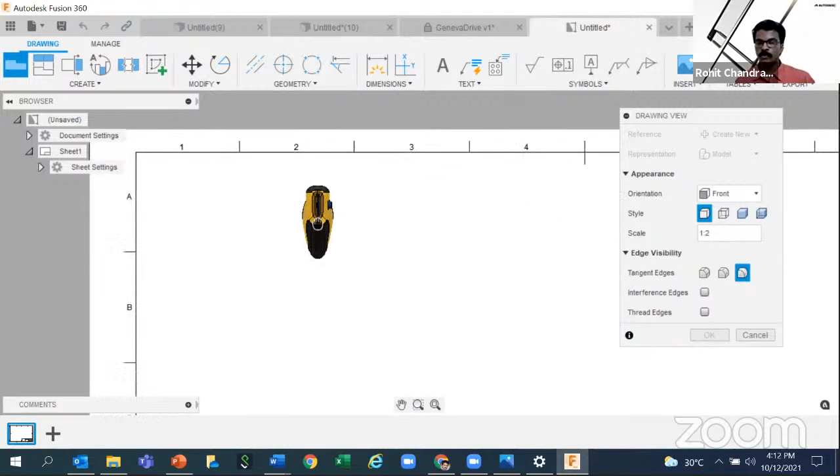So this is your ISO A3, and on the left side I have A, B, C, then 1, 2, 3, so I can decide whether I want to keep the first view in the B3 area. That's why everything is divided. Then downside I can see a title block - I can customize it, or the automatic name with date, name, and account will be taken automatically, or we can override all those things.

So I'm just keeping it as one view - one second, one side view, 1:2 scale is coming. That's fine.

I am going to create a very user-friendly projected view. Just drag and drop onto the isometric view, this will do, right click OK. But it's coming just like a frame, right - wireframe. Wireframe is actually another type of visual style representation. If you want the appearance to come, change it to this one, so your document will be with the same physical material.

It's not done because we have to do some dimensions also - not just some dimensions, dimensions are very specific. So we have to spend some time deciding whether you want to dimension the circle, or if you want to add some text.

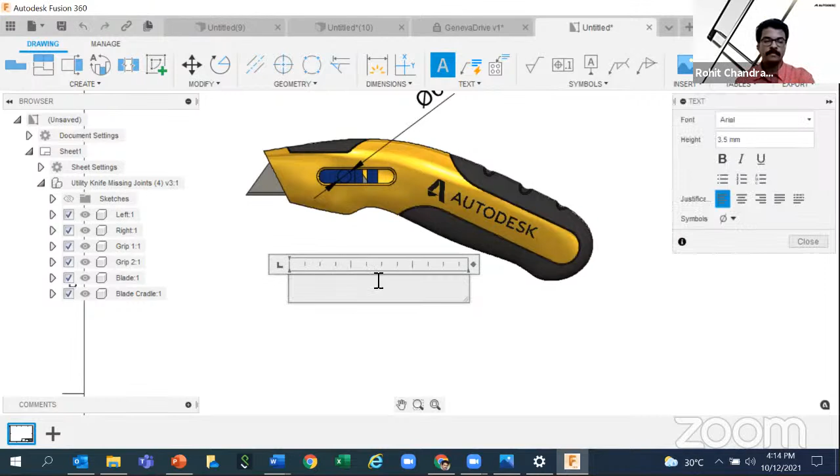Then you can format it - all these justification options are there, right? And you can even add the center line and many more minute details that you see in real life drawings can be added here.

For example, if you just type blueprint as the name, like blueprint BMW, you can see the front view, side view, top view with dimensions. Even in your phone box, if you bought a new phone, you can see the dimensions of the phone - all those things. But if you specifically type blueprint and get the product, you get more details. That's actually documentation - it's not just dimensions, something more precise will be there.

This environment is more related to CAM - that means we are telling the fabricator that we have to manufacture in this specific method. So surface texture and more details can be added to this documentation, like electro polish, and you can always keep it.

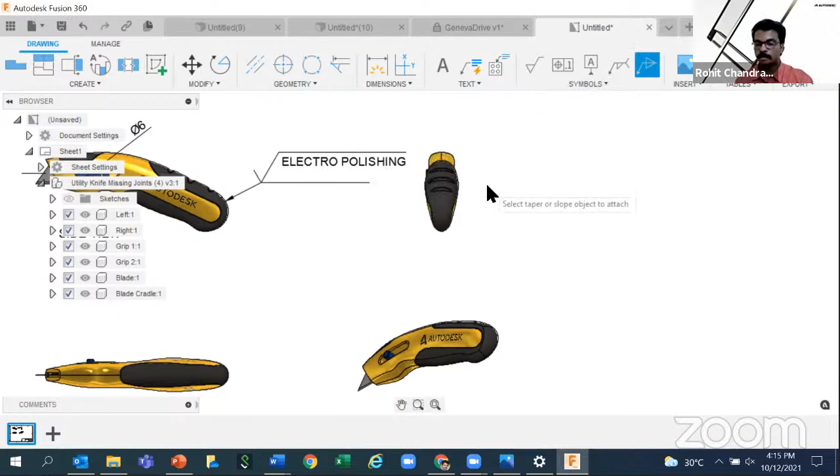Everything is subject to customization. You can add the dimensions, you can add anything you want, any extra features, geometrical dimensioning and tolerancing with the welding criteria, what taper and slope, to make the technical drawing more complex. You can do that. Right now, I'm just showing you up to the table.

If you want a table directly, you can instantly drop it and you will get the table. Again, if you want to go to sketching to create your own table, you can delete this and create that. Finally, once done with all those things, you can export it.

You can export in the form of PDF or DWG. Many options are there. I'm just keeping it as... just save it as a document.

It's not just one sheet, multiple sheets are there. You can have multiple sheets and you can publish all the sheets. So this is the document we just created. I hadn't given any more detailing, just showing you the options of how you can do that. So that goes for the technical drawing part.

Okay, as a separate PDF. And again, if you want to save all those things back to your Fusion Cloud, just upload it. Never mind whether that's a PDF document or even a picture, upload anything you want to save it in your cloud.

And you can watch everything on your smartphone. Fusion 360 app is there. Or if you want to open it on the web, that globe symbol will take you to your Autodesk account. Even a PDF or Word document, anything will open there.

So never think that's just for the design. If you want to even view a picture, everything is there. It's a cloud, so everything can be viewed and downloaded without even using Fusion 360.

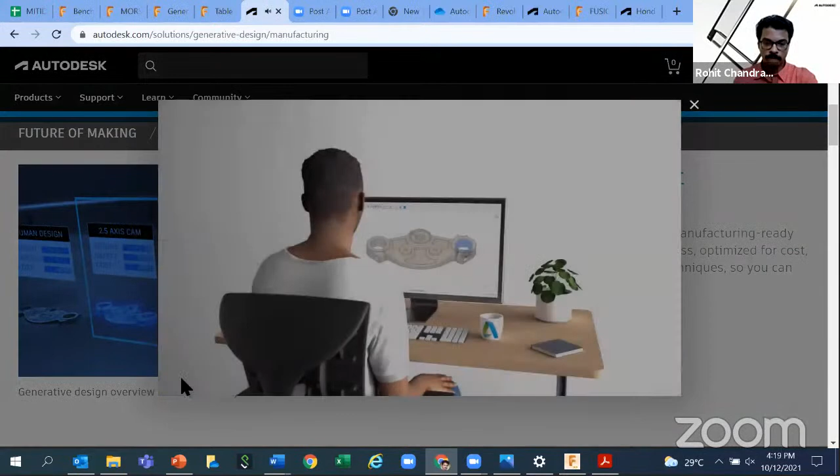Autodesk is bringing together human creativity and cloud to create better products.

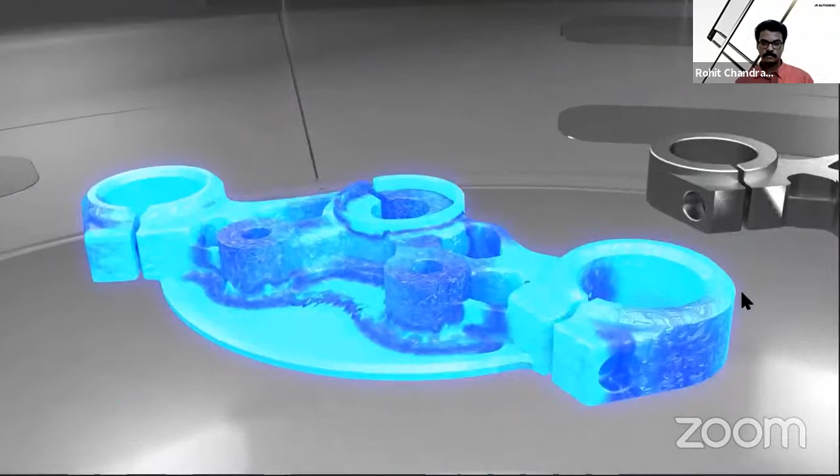Autodesk is bringing together human creativity and machine learning to automate and accelerate the product development process. Generative design is a form of artificial intelligence that leverages the power of the cloud to create better products. You can explore multiple solutions in less time than it takes to develop a single concept using traditional methods, with powerful capabilities that allow you to evaluate multiple manufacturing methods: additive, subtractive, and casting, all optimized for the equipment on your shop floor. Balance optimal performance with accurate insights to understand the cost implications of different production methods earlier in your workflow. Connect with world-class simulation tools for additional design validation to achieve smarter solutions and superior outcomes. Amplify your team's ability to innovate with generative design in Autodesk Fusion 360. Make anything.

These are actually done by the global teams. I will show you what's output by students as well. So you can search generative design Honda, generative design Hyundai, General Motors, Airbus, NASA. You will get direct case studies from that. Just search, or I can paste the link directly in the chat.

You will be redirected to the official Autodesk website. Now, generative design is used to create something tougher and lighter. I will show one small case study before winding up, because it can help you. For creating structural related things, generative design will be the right choice for you, maybe in your future, not right now.

So I'm just showing you one file. One second. GE bracket — it's actually a bracket used in aircraft. So this is generative design. If you use your official ID, automatically that will be showing you access to generative design. But if you are using Gmail to activate Autodesk Fusion 360, then you cannot see this generative design.

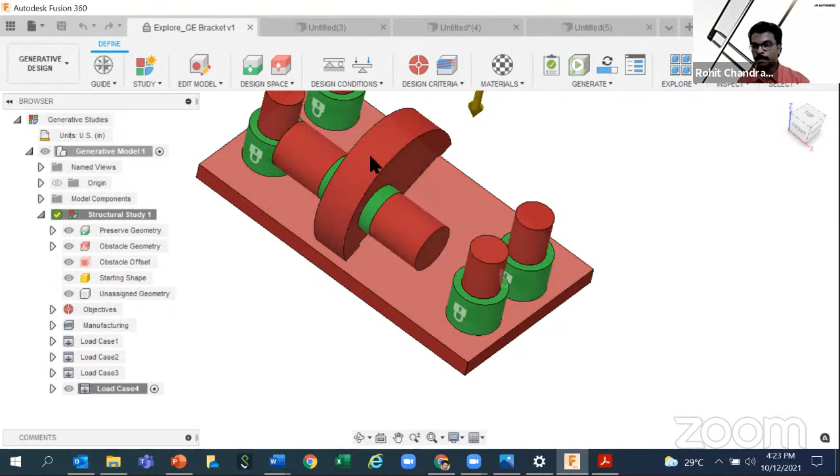Many features are there. You can add load conditions, any type of load you want, by selecting here. Based on that, you will get the structure. You can select what materials you want, and finally solve the study on cloud. This is just a quick preview — I'm not saying it's a very big thing, but it's used by industries all over the globe. Just to give a heads up that one technology like this is available.

Go to explore, and I will show the results. This is actually the bracket. That bracket got changed to something you are going to see on my screen right now. It's entirely a cloud thing. So many design students across the globe have already used it as part of many competitions, and they found successful results.

So see here — whatever we want will be retained, and whatever we don't want will come as obstacle geometry, so that filling will not happen there. This shape is actually the power of artificial intelligence, not a human design. The outcomes you're seeing are all individually unique designs, which can be manufactured with different methods, including additive and subtractive, die casting, and all are unique. Instead of one, we get thousands of outputs. That's generative design.

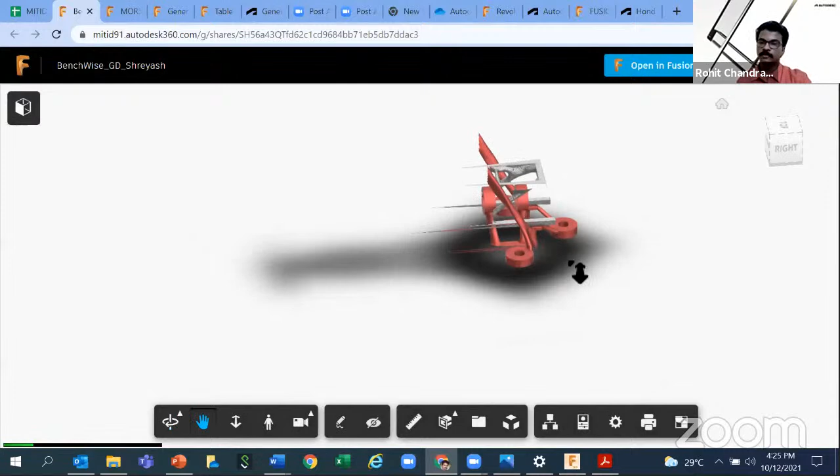Two more inputs — I will show what a few students have done. This is just a shared public link I have of that student, from a top design school in India. I won't say the name. Maybe the student will be online. This is a machine vise, and see what he has done — as part of the project, he made this machine vise using generative design here.

Then this is one student's project to hold the guitar — a guitar holder. You can hold the guitar here, and it's actually a structure which can be held to the surface, wall mounted. This design — these four loops as well as this curvy thing — is the student's design; the rest is the software.

And one more — a Pepperfry table. We had given a project to the student to design something more aesthetic and user friendly, that could be made into a real model. The student came forward with an idea — she took one design from Pepperfry online, then redesigned it with generative design. So it's typically a structure, and the wood appearance is also added.

So these are student projects — I'm not showing much because many things are there: a wheelchair, many types of brackets, all based on the student's imagination. If other students already found the solution, definitely those attending the program can find the solution too. Even if it's big or small, whatever you contribute really matters, not others. So your part you have to play.

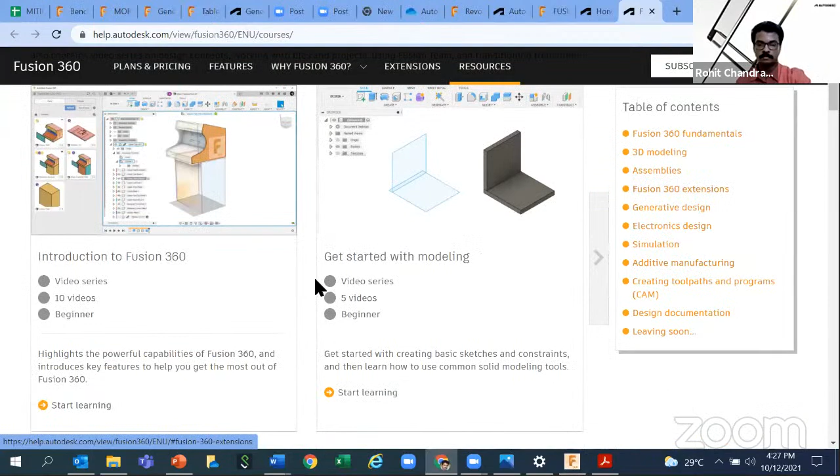But for higher learning, go to academy.autodesk.com. There you have a handful of courses, and all of these have international authors. It's free access only. You can directly use your Autodesk account to learn, and you can select which software you want.

So these are the contents. You can scroll down to select your course of choice. This is for generative design, and if you want to go for prototyping or modeling - I had also taken examples from these contents only.

So this is one course actually. Directly click on enroll, and once you complete it, you can even get a certificate.

So these are many learning things. Same model, reciprocating - you remember this? This is a similar model that I had also created. Everything is available for you with free access, international contents. The author is Matt Perez, so it's an international author.

So check out the courses that you really like to do. Spend some time, and it's a self-paced course, so you don't need to complete it in one go, you can take your time. Then you can share everything to your social media to show what you have done. You can recommend the course.

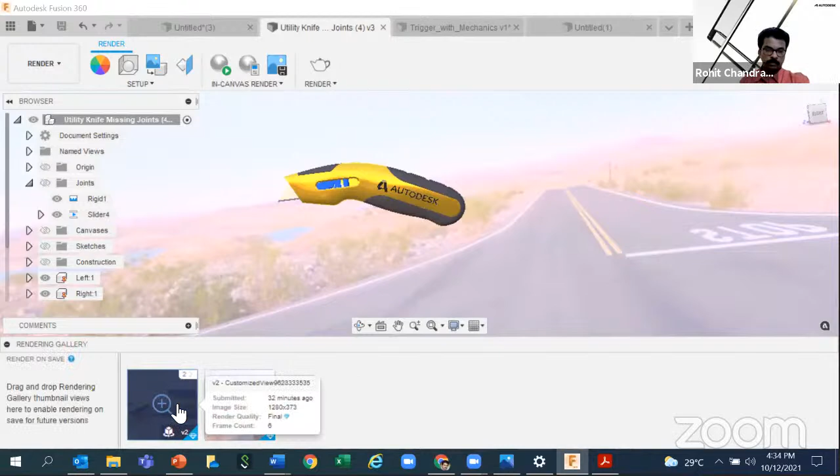If you want to get attention, what I recommend is you can put it to the gallery, directly you can share it. I will also share that. So, the Autodesk gallery - if you go for the render, if you already had done some render to your model, it will be coming as a gallery, right? So in the gallery itself you can directly share. This is one direct sharing option. You can share across the globe, or else you can go here, to community, gallery.

In the gallery, first you can, if you sign in, you can also add your... okay, so I will share. So here, what you can do is, our logo will not be coming. The only thing is that anyone can directly click to access your direct link. From here there is a share option - that's what I meant.

Pinterest, Twitter, Facebook - but if you don't want to do that, you can individually create your design and put the hashtags as well. I'm not saying you always have to do this; it's for getting extra attention, because this is actually a global platform, not just regional or community based. It's a global thing, so if you want a bigger approach to grow further, sharing with proper hashtags and using the Autodesk gallery as the right resource tool can surely reach you in many ways you can even imagine, because it's actually on the cloud.

Everything is going to the cloud right now. That doesn't mean we are promoting that everything should come with Autodesk - it's actually your creativity, and we are thankful you are good users of our products, but that doesn't mean the logo will always stick. This is a friendly community - you can ask doubts in the forums. Many teams are there, so if you go with the communication and such, you can be part of different teams like forums, and there's a blog too. Many people don't even explore this.